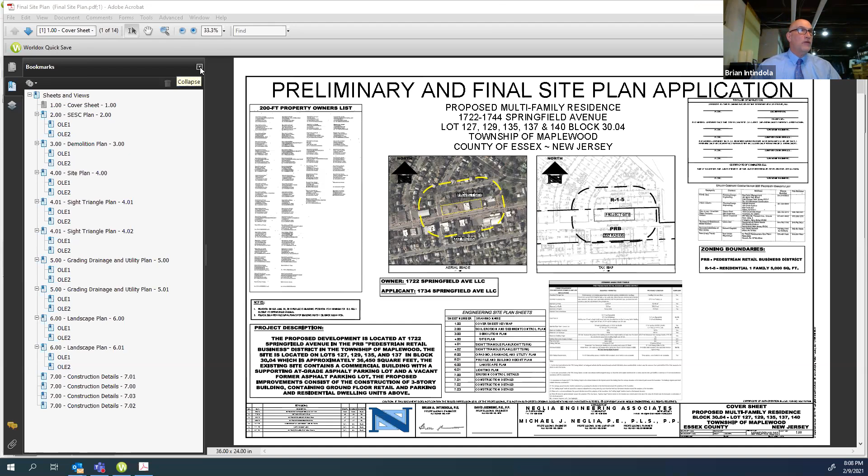Okay. So basically, this is the site plan that's before you. As we were speaking about, this is the cover sheet. I'm going to go into the aerial a little bit so we can appreciate where the neighborhood is. That yellow rectangle represents our site, which shows the existing H&R Block and the little used car dealer hut that will be demolished, as well as the H&R Block, to make way for the project.

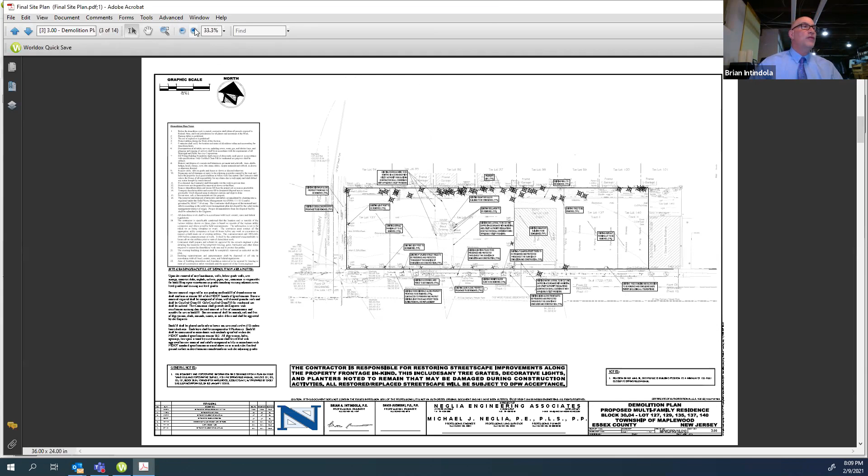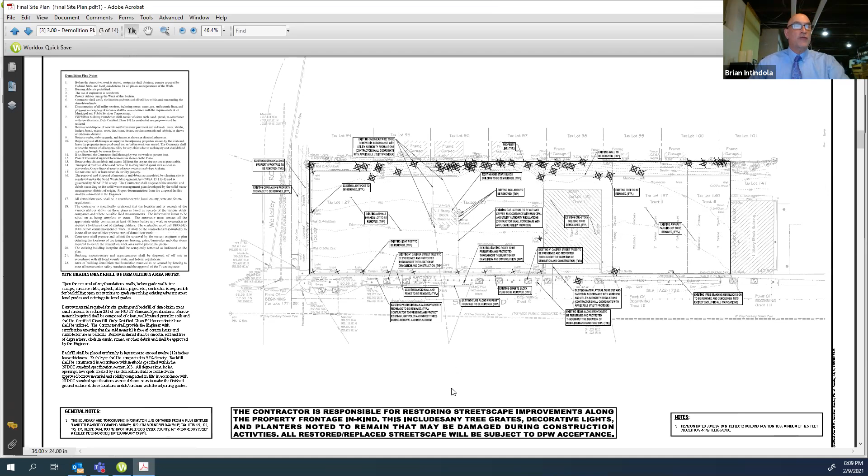We are going to remove all the open curb cuts along Springfield Avenue that are there and consolidate them into one. This would be sheet 4 of our site plan package, a 1-for-1, where you can see the parking level. We are proposing a mixed-use building with a mix of 16 one-bedrooms, 24 two-bedrooms, and 2 three-bedroom units. I believe the count is right - I don't think that's changed.

And then we have a small retail space of about 1,700 square feet that Mr. Waga, the architect, introduced. That's going to be neighborhood retail or something of that type.

As you see, our parking spaces, even though they are underneath the building, provide typical maneuverability of 9x18s with a 24-foot parking aisle, which is as to be expected. And we've strategically located the ADA parking opposite the entrance area, as well as with a crosswalk denoting that that is the area to walk in.

One of the features of this, I'm interspersing site design as well as the functionality for access, but I will reinforce that with traffic testimony as well. If we look where my cursor is, we do have an inset to manage vehicles so they can get quickly off the street and also be card managed for access in a way that it's not blocking the sidewalk.

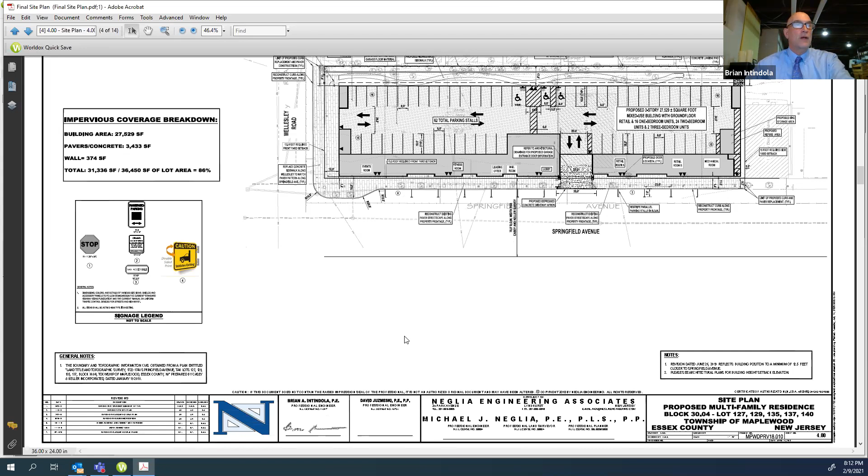As well, we heard last month that it would be appropriate to look at a fisheye mirror or convex mirror system to give a better field of vision for both pedestrians and motorists coming in and out of the site.

So then, going on to the sight triangle ordinance, I believe this would serve as a template for what you would want to see. We meet the sight triangle based on the 35-mile-per-hour road.

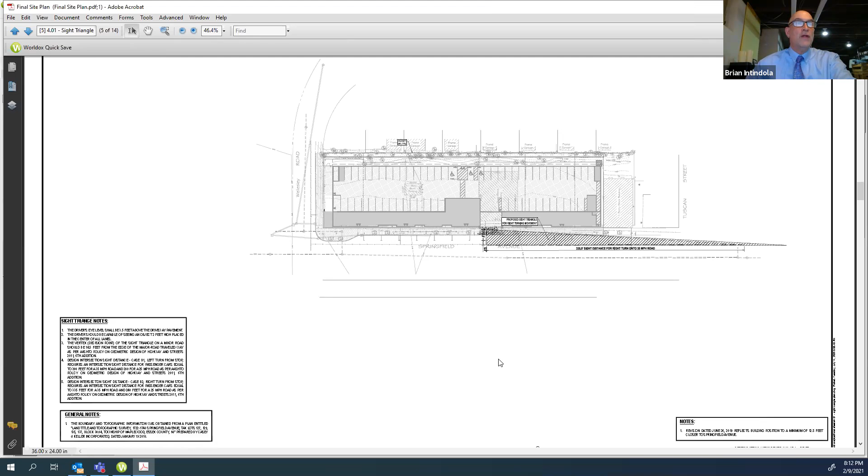That is looking out, that is the right turn out. And then we have the other one, which is the sight distance for left-turning vehicles, and we make the sight distance. We don't see any obstructions using typical engineering sight distance. So that is addressed in our site plan package as requested by your reviewing engineer.

Our next thing to touch upon is our drainage system. We are going to capture stormwater from the site, bring it into a piping system, have an oversized pipe to retain some of the water, control the water out, and then send the water out to the existing storm system, which is a former NJDOT system as well as the township system. We believe there's enough capacity to accommodate what we are piping.

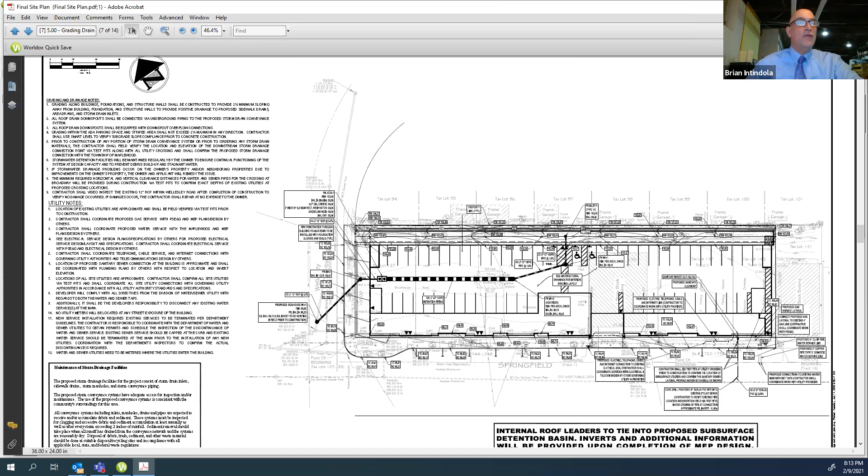And as the site is mostly impervious today, we are slightly more pervious than what is now. So we believe that, one for one, it will actually generate less stormwater.

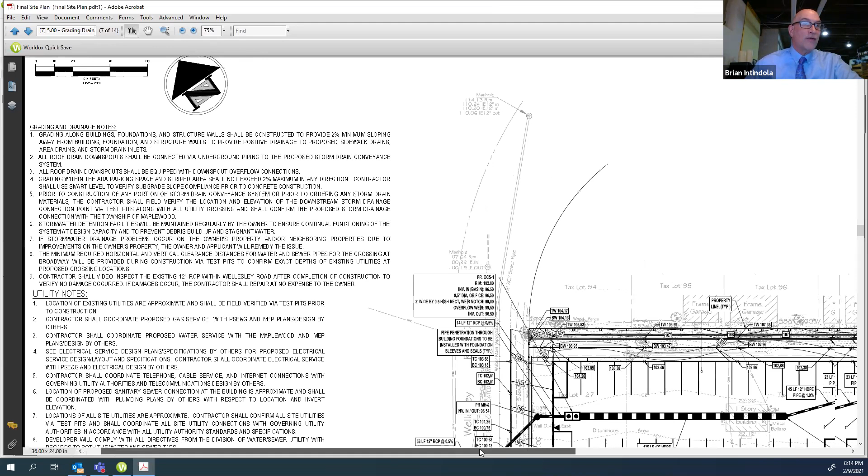I'm going to zoom into the rear yard in terms of grades. It's not really a rear yard, it's a double side yard, but that's okay - just for speaking the vernacular, this is the run. We have a retaining wall, I don't know if you can see it with my cursor, top of wall, bottom of wall. The wall follows the grade.

It kind of diminishes as we work our way down Springfield Avenue away from Wellesley, till it fades basically to nothing. One of the prior iterations of the site plan recognized that this was maybe an impediment to this exit door. We have since removed that wall and we don't have as much of a return wall as prior. This area back here has an undulating sidewalk with future plantings, which will be touched upon in the landscape plan.

Another feature of this is that we are respecting the setbacks as required for Wellesley, and also the transition lot we are not respecting next to the liquor store. We have an alleyway, and we recognize that we are asking for that variance, but it was touched upon before. And this is a walkway that, as the architect has said, has limited access out - I believe that's the intention of that walkway.

We did provide that. And we also note that we are respecting the Wellesley setbacks, and we provide a, well, I'll characterize it as a generous sidewalk in the front that can be used for the intention of the pedestrian zone that we're in, providing plenty of pedestrian space for that.

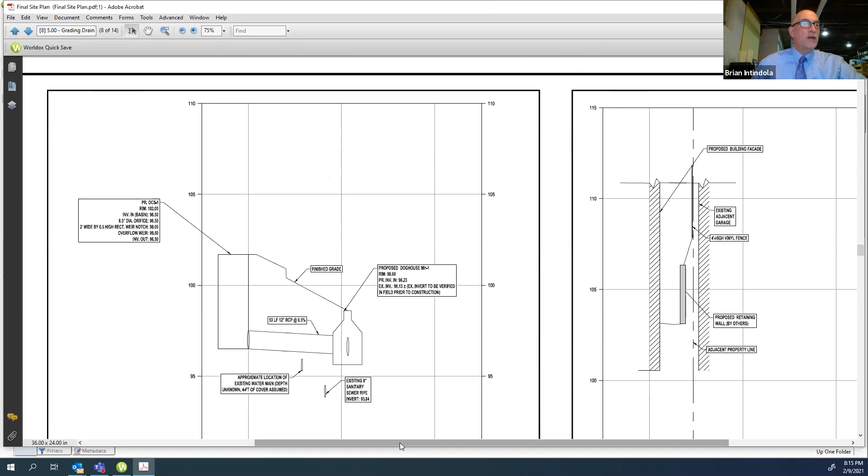These are just some of the details of the site plan in terms of elevations that were requested. And then we have the drainage and the profile, and the building height is all marked here. That's how we get the average grade - it's 101.

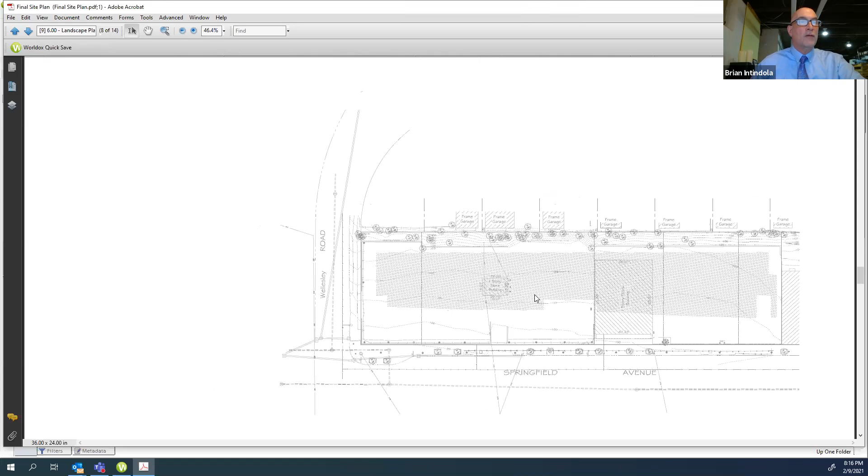And then I believe that the architect, as well as our planner, will talk in more detail about your ordinance with respect to height.

And here we have the landscape plan. We are removing the various trees that are in the back, but we are replanting a run of emerald green arborvitae, about 61 in total. And then we're doing 3 accent trees in the undulating path in the grass area in the back, which will be accessible back by the garage, as well as the exit doors in the back corner of the site that lead to that alleyway.

If I may, sir, quick question. How tall will these arborvitaes grow? What's the maximum height?

Well, if they're done right, I've seen them be comfortable at about 20 feet. They can come in at various sizes. They have most success where we put an irrigation system in with a soaker hose, and I would recommend we come away from this meeting with that as a hard condition, so we have some assurance the arborvitae do thrive. As for the install height, we're looking to go not the 4 to 8 size, but maybe the next size up, so we get immediate screening and don't have to wait for nature to take its course. The intention is they're installed at 8-foot minimum.

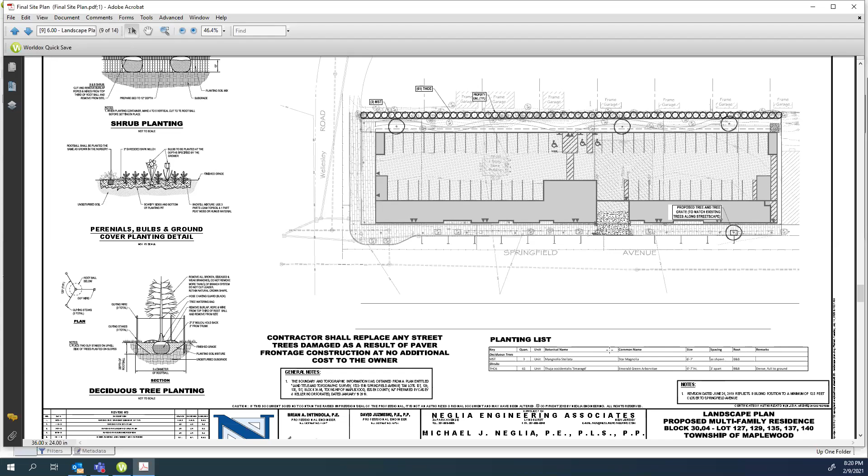Yes, I take your comments to heart, and fortunately we have an excellent hybrid planner/landscape architect on our team, Mr. McDonough, and we would like, at your lead, to come back with a plan that will be interesting to look at through the 4 seasons — not to editorialize what you're looking for, but something more interesting instead of a palisade of arborvitaes.

We understand what you're saying. And just as a side note, not that I'm a landscape architect, what we found recently — I just planted them myself — is that they have a double blooming lilac. I didn't know if anybody knew that. It blooms in the spring and in the fall, so maybe we can work them in as well. I'm a big fan of lilacs.

But yes, we would come back. Of course, as the advocate for the applicant, we'd like to be one and done, but we understand the careful thought this board gives to its applications. We would come back with a more carefully thought out and hopefully beautiful landscape plan for the rear portion. So I don't know if we've answered that comment, but we're willing to participate in that process.

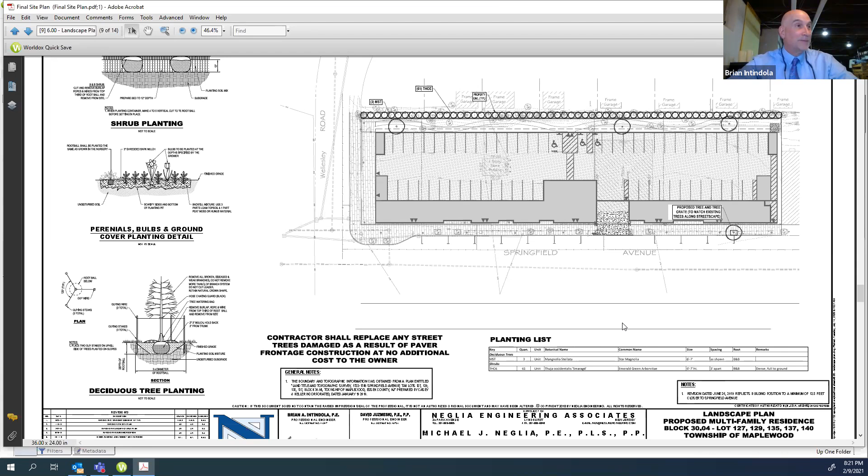That is the overview for the lighting plan we need to discuss. What we are intending to do is mount as much as possible and provide the functionality that we need in the rear yard, or the undulating run in the backyard.

We provided a well shielded light that respects your ordinance. As you see in the lighting plan before you, it would cut off at the proposed privacy fence, which we are going to construct on the property line, a little bit off the property line as is typical. We're hoping to put in a tasteful PVC fence, which is the current style, and then we would have the trees to supplement that as well. That's what's illustrated on the lighting plan, sheet number 6.01.

Mr. Intindola, just for clarity, so the arborvitae or some other natural screening would be outside the fencing? It would be. Working your way from Springfield Avenue, going out like a rear door here - you're in the grass area, then onto the sidewalk, then you encounter the knee wall, the retaining wall to make the grades work, and then you'll have a row of arborvitae, and then the PVC fence.

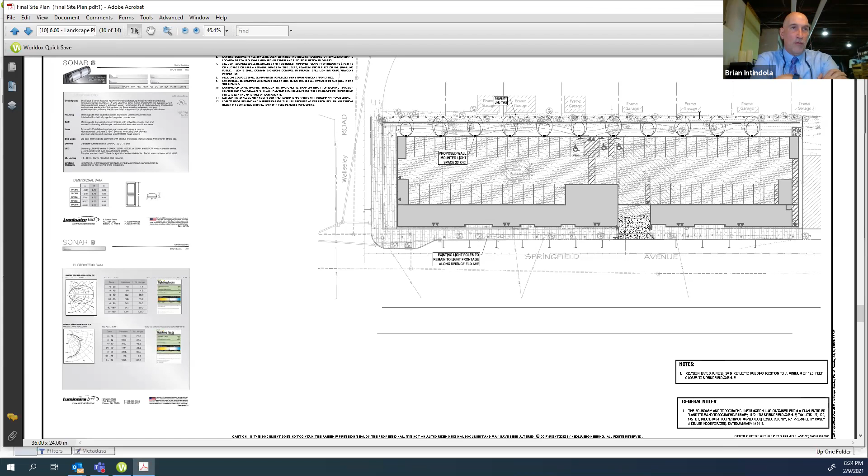And how high will the PVC fence be? At the board's pleasure. I'm a fan of the 5-foot fence myself. I think 6 is sometimes a little bit walling off. And I think interspersed with the garages that are there, the 5-foot will work nicely. Then you'll have the hopefully tasteful plantings poking over the fence in the future or upon planting.

And the bottom of the fence will be above the grade of the knee wall, correct? Yes. So how I grade that is I like to put a little back pitch so that you don't have the airspace between the bottom of the fence and the backyard. So what we do is set the fence, and then I basically build a small berm as we come up over the top.

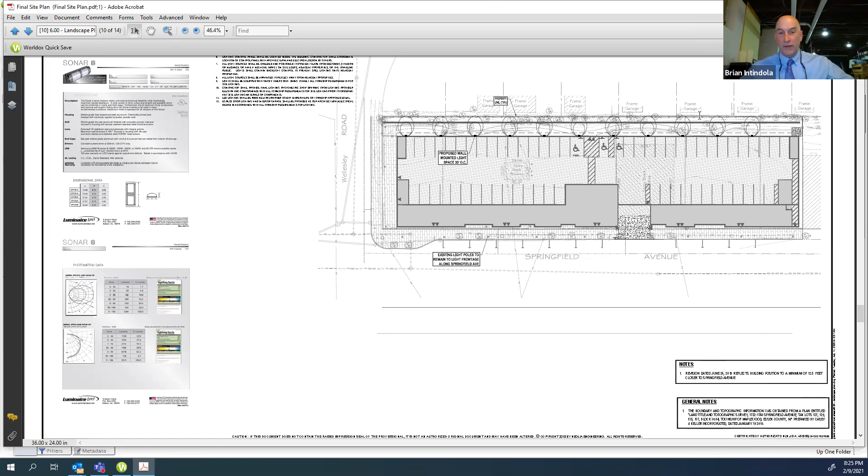It's just enough to cover that airspace, which is the way I like to do it. We'll follow that through on construction. It gives you the sense that the underneath is covered - instead of burying the bottom of the fence, you come off a little bit, then build a little berm to cover that gap space. When you set fences on a hill, you'll sometimes have a staggered fence line that has to drop down, and that drop helps make up for it, because then one section is clicked a little higher and then down low, and I can do a consistent line across the back of the fence. That gives you that little detail.

I apologize for that ringing phone. My family, I'm sure, will answer it momentarily. I'm waiting for my father-in-law to call me.

So what I'm getting at is that if you're standing on the sidewalk - the undulating walkway across the back, not the sidewalk in the front, I misspoke - I understand what you're saying. Right, so if you're standing on that, the knee wall will be how high?

I think in that area it's about 5 foot. I can go to the grading plan and give you a definitive answer, but that's my estimate. I'm trying to get a sense of how high the PVC fencing will appear to be. I recognize that it will be 5 feet from grade if that's what we choose ultimately, but I'm trying to get a sense of how it will appear for someone standing on that walkway.

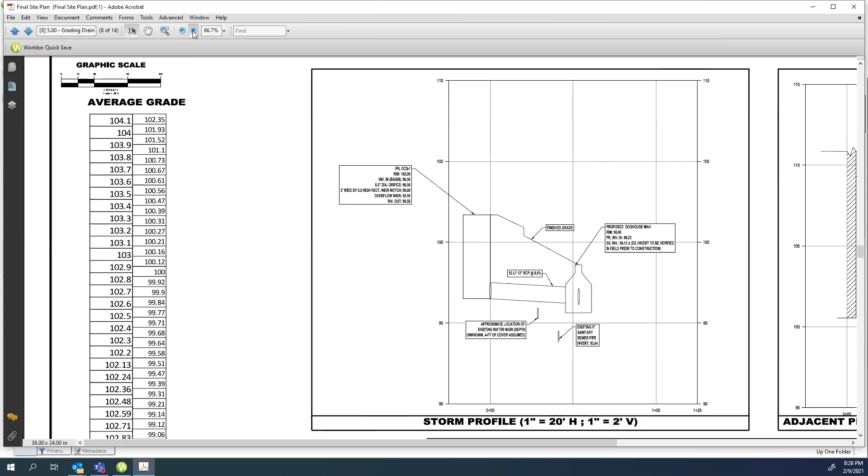Yeah, and I totally agree, Chairwoman. I think we said this at the last meeting that a section would be really helpful to see what it looks like from eye level - like I'm a neighbor, or I'm walking along that path, what am I seeing? As opposed to these tiny drawings that I literally need a magnifying glass to look at. But I get it.

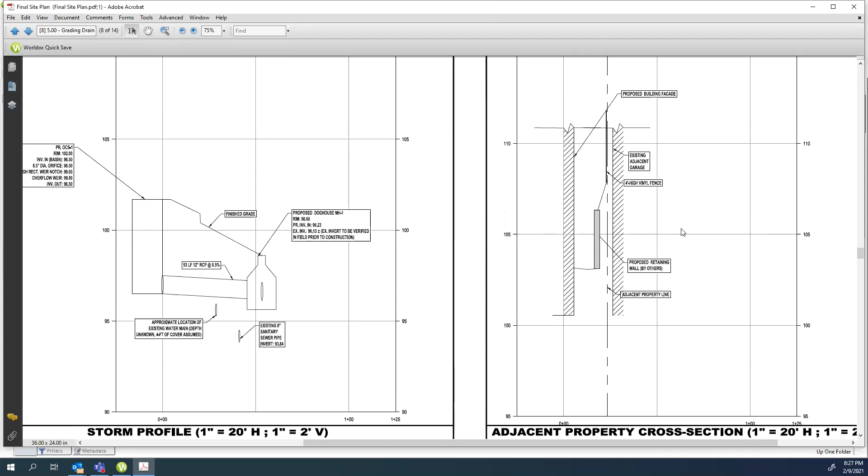We're restrained by this, but I think it would be good to have a section, like I asked for at the last meeting, showing what the people who live on Amherst behind it see. Go ahead, Brian. I was going to address that, but go ahead.

So to answer your question, we did an engineering cross section. I don't know if it serves the purpose or not, but we struck a line through this. That line is exaggerated with height in the vertical axis, which is typical for engineering illustration, but if you were in that spot... let me see if I can get both in at the same time. So if you were standing here-ish, where my cursor is...

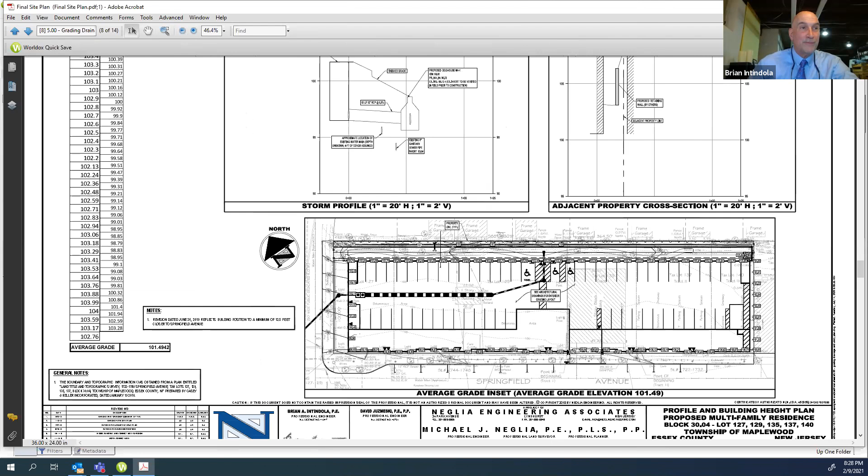What you would perceive is the proposed building facade. Then you encounter the proposed retaining wall at this spot. Then there's the upgrade where we will put the arborvitaes. Then there's the existing garage. You can see this. The existing what? I'm sorry, I missed what you just said. The existing garage, sorry.

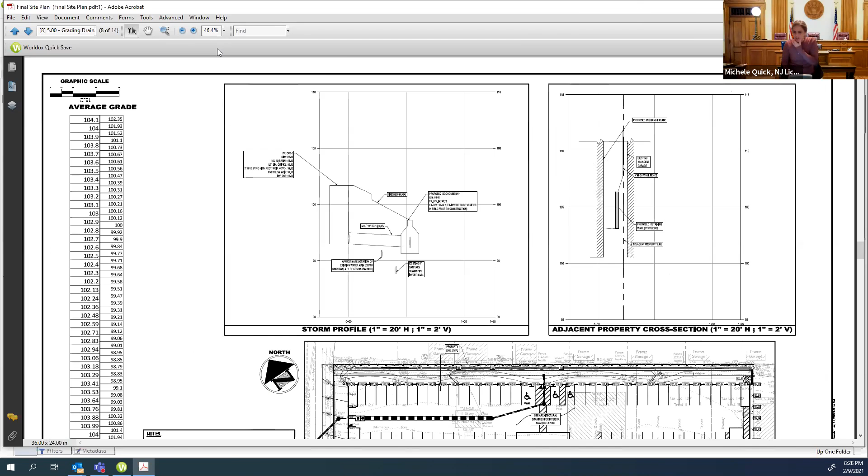Getting back so you could see it better. So then you would see this is basically grade. This is the proposed retaining wall, like the knee wall. And in this axis here, you have what we illustrated, a 4-foot high vinyl fence, which I said was 5, which is what I prefer, but to be consistent with the plans, it is 4. And then you have the adjacent garage in that section.

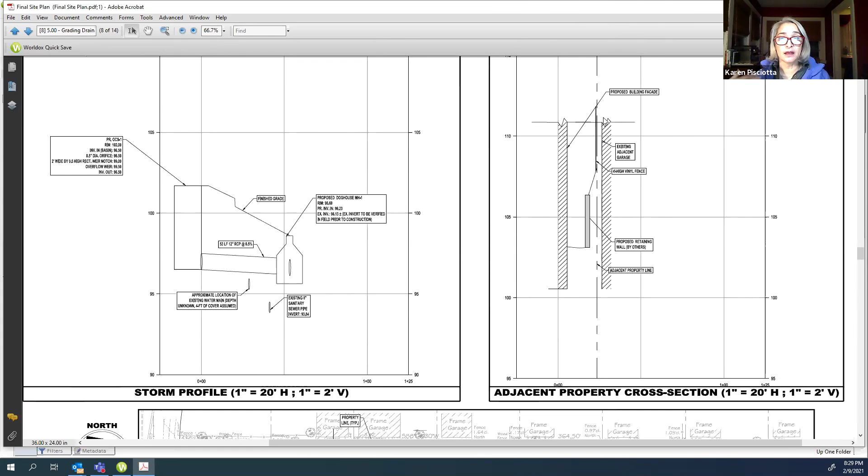So if you would look, I think one of your comments, and I don't want to mischaracterize what you were asking, is that you may feel like you're in an alleyway in this run. Well, that was part of my concern, but it's helpful to see that the garages of the adjacent neighbors are very close to their rear property lines. I'm not suggesting there's no need for a fence. I like the idea of a fence, and I like natural screening. I just wanted to get a sense of what that height is going to be like, because part of my thinking on the fence height, 4, 5, 6 feet, whatever it should be.

And I don't have a strong opinion yet, is in thinking about the placement of the fence, the grade, the changing grade from the knee wall to the berm you're recommending, to the fence after that. So although it may be a 4 or 5 foot fence, for someone standing on the undulated walkway, it will appear to be a much taller fence.

Oh, absolutely. But the other view, the 180-degree view, is that if you're living on the back street, you have a good-looking PVC fence at the appropriate height to provide the screening you want. So from the applicant's perspective, and I might be getting kicked under the table, but he can't because he's not by me, which is good. So we would provide the fence height as appropriate that the board would like. Basically, if you look on the backside, not that I did the calculation, but the frame garage here looks like it takes up about 40% of the view shed. And in the space in between is where you'd see our fence.

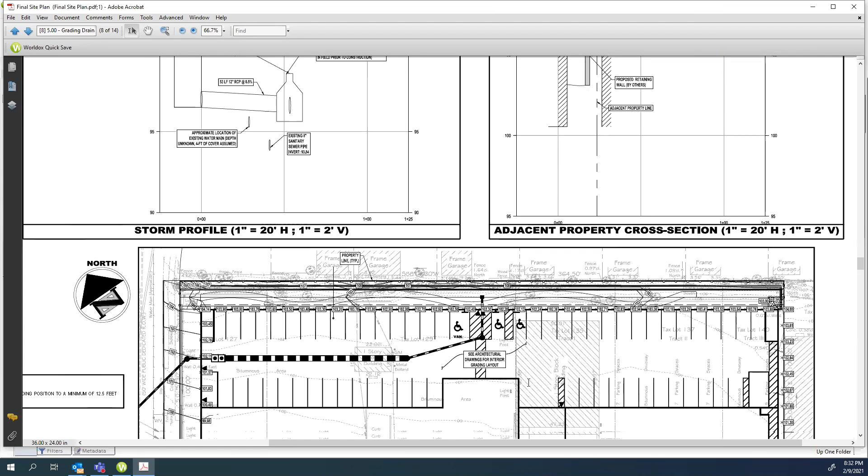Oh, sorry. Could I just, while we're on the fence, add - I didn't miss the irony of your attractive PVC comment, because I don't think those two words go together. Is there a concept for something better than a PVC fence?

Well, if we go through the catalog of what fencing is available - we start with chain link. That's a non-starter. Right, then you have chain link with the evergreen strips through them. It's okay, it serves its purpose. No.

And then the next option is we switch over to wood, dimensional wood, like a shiplap, every other board, which gives you some dimensionality. I don't believe it weathers as well as the PVC, so it might require maintenance by the property owner. No, and we're not averse to that, but what I notice is that the standard white PVC fence, like you'd see at a pool club when it first came out, has gotten a little better, and we could do a wood grain PVC fence with lattice on top.

Not that we're going through catalog cut sheets right now, but if we are coming back anyway for the landscape plan specifically, I believe we should also offer a couple of cut sheets for the board to look at of state-of-the-art fencing that is also weather resistant. I don't know, is that a decent proffer for the board?

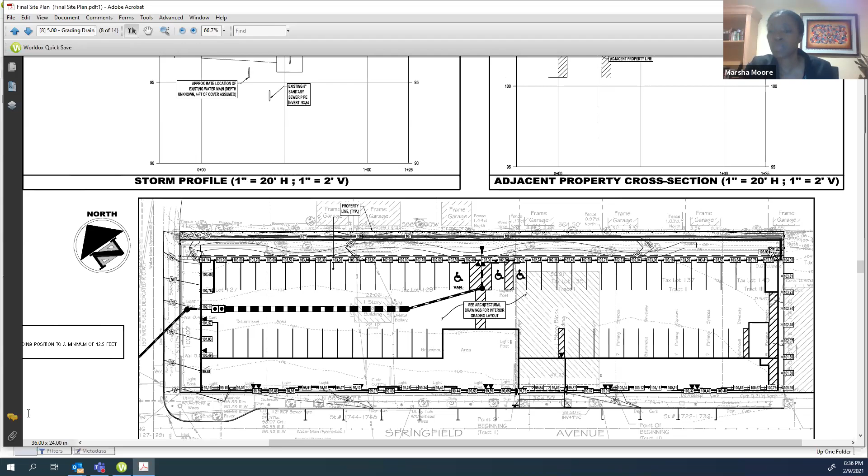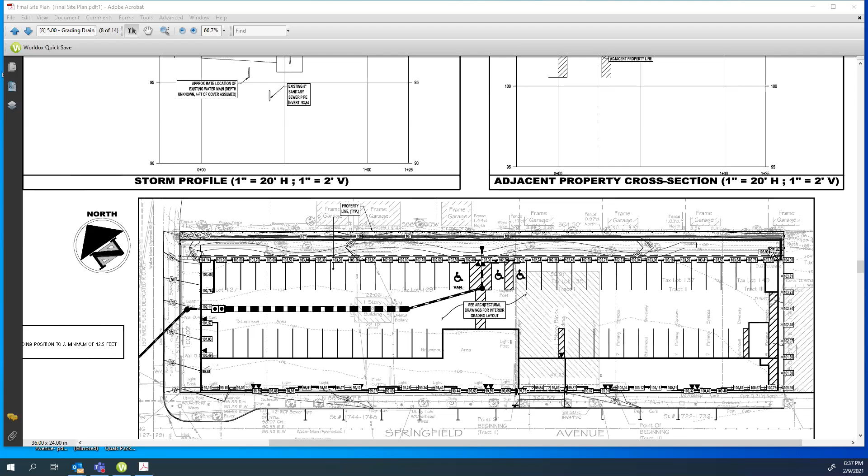Madam Chairwoman, I believe Deborah Lyons, who's chair of the Springfield Avenue Partnership Design Review Committee, is present at this meeting. So it would be great to get her input if what we're trying to do is get through this. No, I'm absolutely agreeable to that, if Ms. Lyons is willing to address the board at this time.

Hi, can you hear me? Yes, we can. Yes, we absolutely did make a recommendation for fencing, and we asked that they not use PVC fencing. We made that recommendation more than a year ago, but that fencing keeps showing up on their plan, so that's the history of that. We would like them to use wooden fencing, in deference to the residents behind them.

That's fair. Thank you.

I'd like to get back to the question I was trying to get answered, which was for Mr. Intindola. Showing us the cross section at the line you had drawn is absolutely helpful. What I'm trying to get a sense of is, at that line—realizing the pitch changes east to west as well as north to south—what would be the height of the fence from the grade?

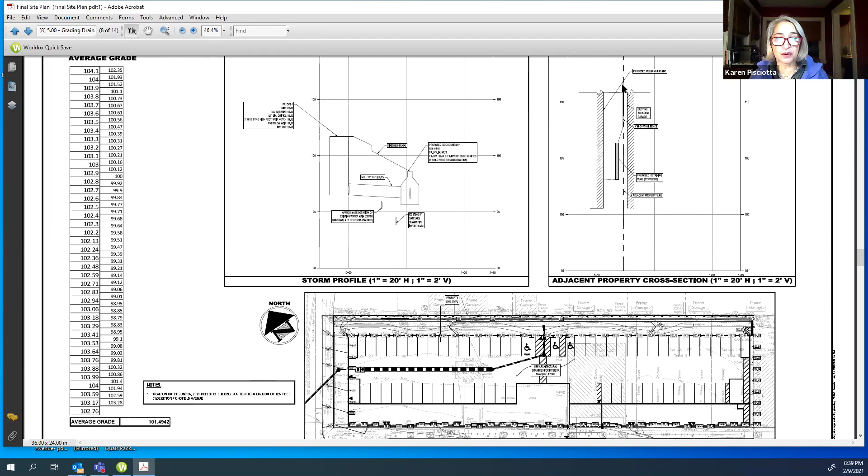Okay, thank you, that's very helpful, that's what I wanted to know. And so then that height would appear lower as you walk east, correct, because the knee wall will become smaller. Is that correct? Yes, it fades to basically nothing, about 18 inches at the end. Okay, thank you, that answers my question.

Did you want to go on with your direct testimony, or should we continue to have the board ask questions of you, Mr. Intindola? Unless I didn't cover anything, I think we covered the site, unless our attorney Marcia has something.

I do have a couple of things before you go into traffic. I know our planner will be discussing the exceptions for the parking—can you give a little testimony on the exception? The requirement is 89 spaces. You mentioned we have 61, and if we include the bike space, it's 62. But we're also seeking exception from the residential site improvement standards, if you can discuss that. Then we can discuss the traffic report you mentioned.

Under the residential site improvement standards, it would be slightly less than the ordinance rate of 2 per unit. If we take 40 times 2, that equals 80, which is your RSIS rate, because there's a mix of bedrooms. I believe my calculation comes in at about 75 in total with the mix of bedrooms. But construing our residential site improvement standards strictly, because there is a retail use, in my reading they govern only to a point as guidance, since you have a mixed-use building in this instance. If it were pure residential, I believe it would apply fully to the application.

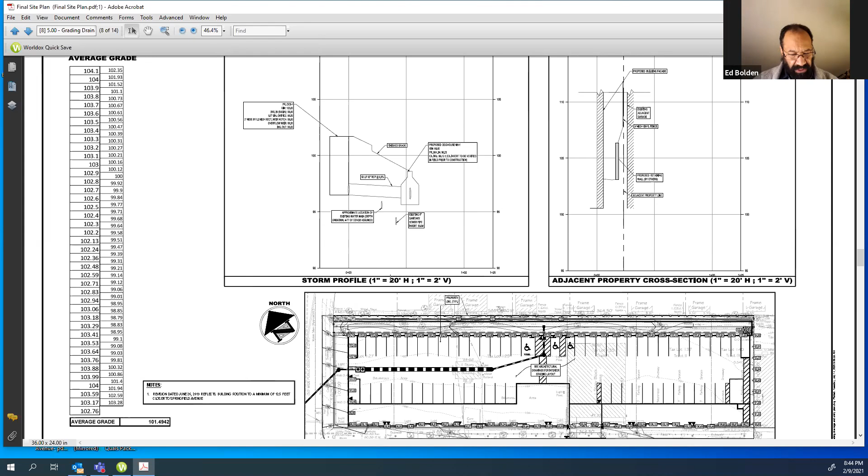That's just my experience. Well, I think you probably would need to have 2 mirrors, because 1 mirror would only get pedestrians from one direction and not the other. Correct, and I totally agree with that, Mr. Bolden. So I would say yes, 2 mirrors. 2 it is.

Madam Chairman, I have a question related to the parking and the counting of the bikes in the total. Is that standard practice to include potential bikes when you're asking for this type of concession with the requirements? Is that directed to me, or is it to the chair? I think it's actually for our town attorney, Edelson, in that this is the first I'm hearing that we're accounting for possible bike parking spots in the total number of parking spaces. I'm just trying to understand if that's a precedent.

No, we're just highlighting that we have bike parking, but we're not relying on it, I guess is the better way of characterizing my testimony. Board member, our notice that was provided was 61 spaces. We did not include that additional space to the public, whether or not we were providing 61 or 62. It was 61 that was referenced in my notice. Thank you for clarifying. Thank you.

Do any other members of the planning board have any other questions for Mr. Intindola? I have one more question about the landscaping plan. I'd really like to see, it looks like there's no plantings along the Wellesley side. And now with that wider sidewalk, I think we could get some really nice trees in. So I think you should consider some trees on that side that would make that whole building facade look nice too, as you're approaching.

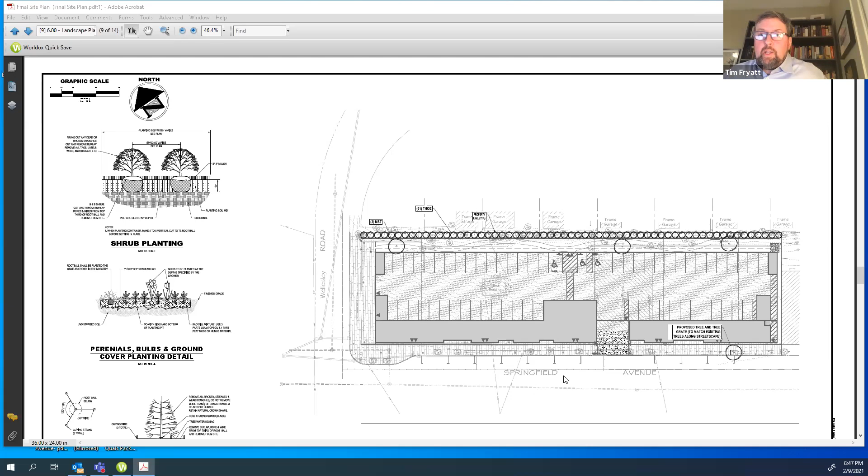I have a couple questions. Certainly, Mr. Fryatt, go ahead. There's a note on the drawings that the proposed retaining wall was by others. Can you explain that? That's because the ultimate design of the retaining wall, since it's over 4 foot, would need to be designed separately. How we approach it is that should the applicant be approved, we would provide to the board's engineer, as well as the building department, specific calculations of the retaining wall. That's what we mean by others. The development is providing that retaining wall, it's just a question of who's engineering it.

Yes, either our office can do it, or we can have a qualified firm assist the applicant, or there could be a local preference to have an engineering firm that has worked with your reviewing engineer. We do leave that; we don't finalize engineering until it's approved.

Can you tell us what the 8x8 concrete landing pad is for? That was East end... the genesis of the 8x8 concrete landing pad on that one corner came from the prior application, and we carried that forward. The reviewing engineer wanted a definitive place, a landing pad, if you came out of that rear entrance. I see, it's for pedestrians exiting to the rear. That's the intention.

There's not a door to the rear there? So at some point, is that correct? But maybe Mr. Waga can refresh my memory. That's why that was there, that there was a door on the backside, so you can come out from a stairwell. That was my understanding. That's why we have it there.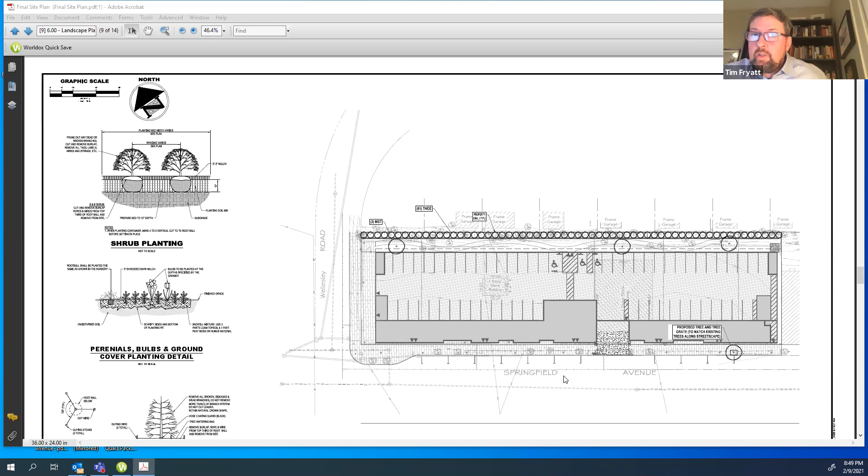I see. And the dog run area, is that enclosed? I don't believe there is a dog run, unless I have a bad note somewhere. We removed that a couple iterations ago. It's noted on the site plan that I'm looking at, which I think was provided last month. Yeah, that is an errant note from a prior submission. So there is no dog run. Correct.

You have an open undulating sidewalk. I think we might have visited this in the past at one point. Is there any opportunity to retain any of the trees on site?

Well, of course, if we are doing that, yes, because what we did was a palisade of arborvitaes, which are now going to be revised if the board's permission is given. We now are taking an opportunity to revisit trees that are removed in the context of the retaining wall and a new landscaping plan. So we do have that opportunity now. Thank you, that's all my questions, Madam Chair.

I just want to confirm, so that undulating walkway across the back, it won't be open to the public. It won't be open. It will have fencing or a gate of some sort at the Wellesley end, and it will be enclosed except for the narrow walkway that goes to Springfield Avenue on the east end. Is that correct? It is like a private mews for the residents, if we can characterize it like that. So yes, will residents be able to enter it from the Wellesley end?

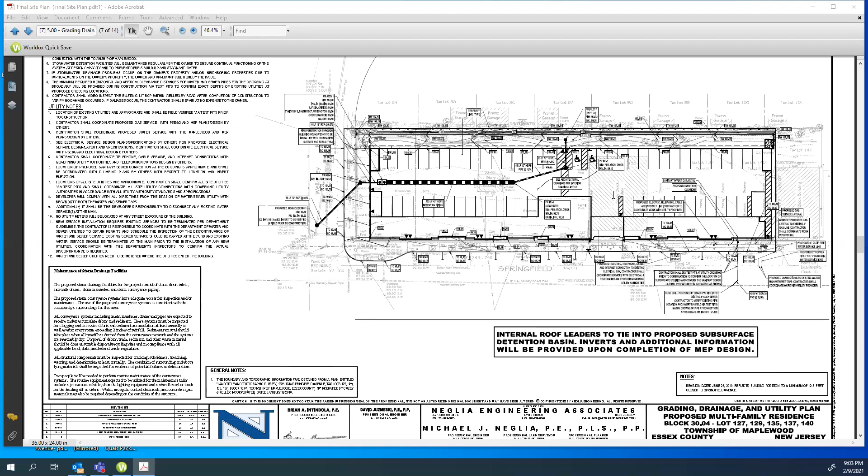I'm literally just responding to what you're saying, but in my mind I'm thinking of the sewer system more than the stormwater management - have you looked at that? We have an old system obviously, and I'm wondering if there's, with 40 units, any improvements to that system being proposed. Excuse me for my ignorance on this, I just thought of it and haven't looked through the plans, but I didn't want to let it go unasked.

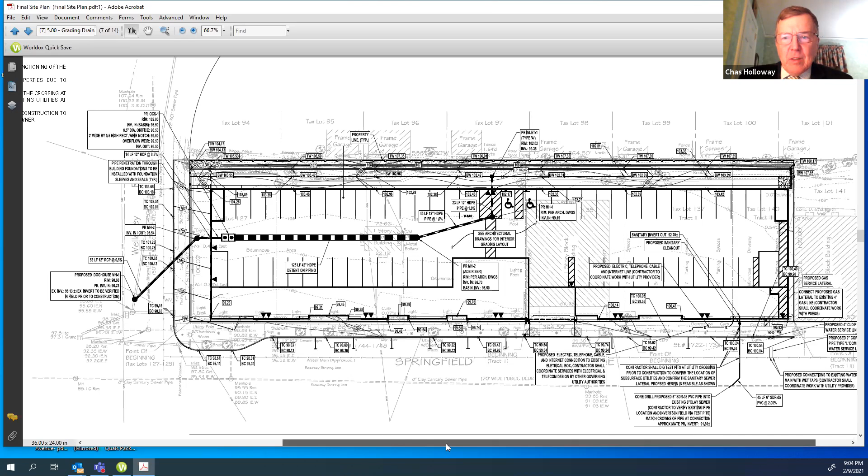No specific comments - it's not atypical for construction on Springfield Avenue. We just did one further down the street for a commercial establishment. It's a little bit complicated digging up Springfield Avenue, but the capacity seems to be there.

I'm just going to zoom in on the sewer connection. My concern is because we are literally spending hundreds of thousands of dollars right now to upgrade this system on Boyden Avenue, due to issues with too much usage now that wasn't intended, into this old system. I don't want to run into the same thing a couple years from now, where we're asked on the township committee to have a capital budget request for $400,000 to improve this because we allowed for 40 more units on top of this many units and this many units.

And typically in a redevelopment zone, that's a developer's agreement portion, but I don't want it to go unanswered before this comes to any kind of conclusion. So I understood - the connections, we could ask the applicant to supply some more information, but the main reason for the connection is how they core drill it and connect to it.

Right, but is there any way to analyze what the usage of that would be, whether or not that's something we need this applicant to address, if he's taxing the system that's already there to such an extent that the township then has to, a few years from now, take the burden to fix the issue of more use than it was intended to have. No, I understand the question.

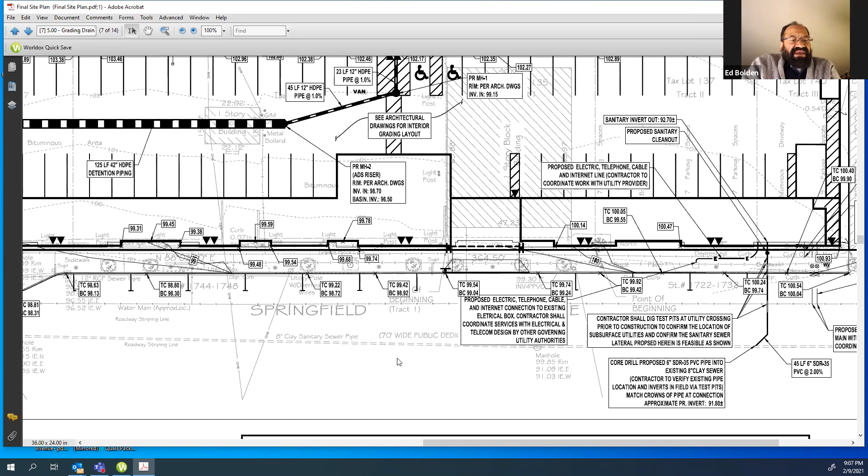Madam Chairwoman, I have one question regarding the retail area. That is for the delivery of inventory, stock, or whatever you want to call it. How does the developer see that being done? During what hours would they be delivering product for these retail facilities?

What we envision is that once you do your fit out for whatever retail it may be, most retail is supported by a panel van delivery, like a UPS truck, a FedEx truck, or a larger vehicle like an Amazon delivery van. I don't think we would need the support of a larger truck unless it was specifically a chain whose logistics go to larger trucks. But we would respectfully submit to the board that this would be neighborhood retail.

What could be here is a dry cleaning pickup, not a plant, or something of that nature. So I don't believe we need to support it with the next level vehicle, and it can be supported with a typical parcel van that is already making deliveries on Springfield Avenue. They would avail themselves of an on-street parking space to make their delivery, as any other retail business on Springfield Avenue. Well, understood, but I guess I'm wondering what time of day these would be done.

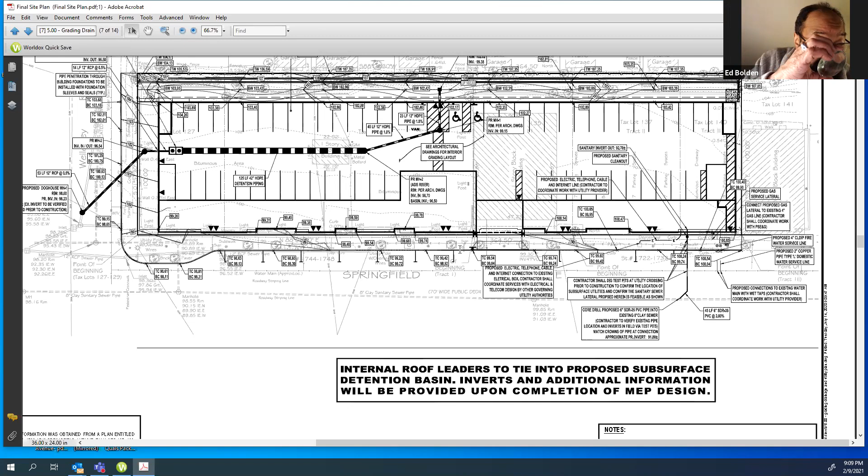Because, to be honest, from the architectural drawings, even with a microscope, I really can't make out the dimensions to anticipate what the square footage is. Well, the square footage is about 1,700 square feet total. Approximately 1,726 for the two proposed spaces. So it'd be like 800 per, which really lends itself to neighborhood retail.

The demising wall between the two may change a little bit, but we're figuring about 800 each, 850 each, which is not large. Basically, as we know, retail uses are diminishing, so we hope that this size will provide a store of interest for the residents of Maplewood.

So your deliveries would be before 8 and after 5, or anytime during the day? I believe that for a small retail like this, it depends on what you're selling. I don't believe we're going for a food use, which would have an early AM delivery. I can't vouch for the ultimate retail that's going to be there, but if there's a delivery restriction that is compatible with Springfield Avenue and the residents, I believe any reasonable delivery time would be appropriate, because we're not providing a loading space.

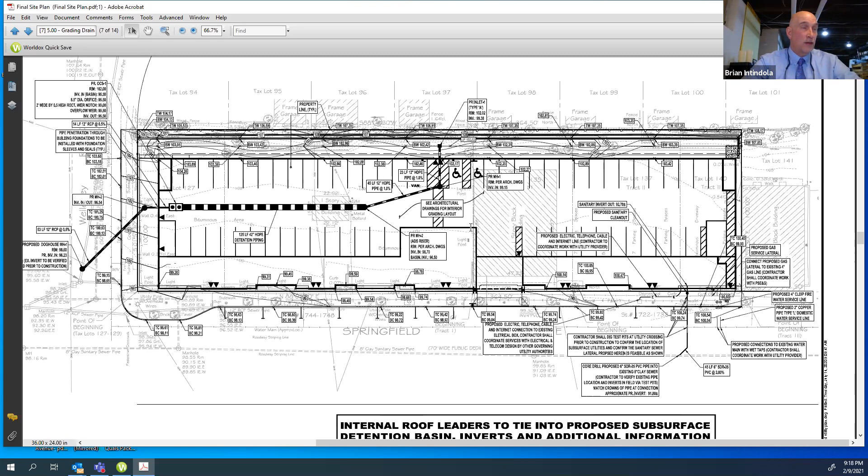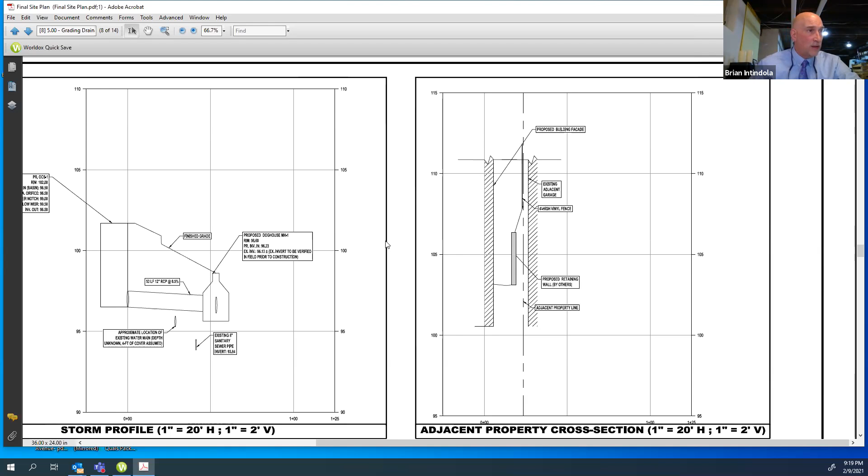Okay, and what is the height of the proposed replacement trees at their maximum? Let's assume they are arborvitae, versus the rear of the building. I don't believe we struck a line to that, but let me go back and provide the answer in the section. At the top of our section here we'd have the trees. We've consumed 5 feet, so there would be 15 feet, we'd be about 115. I don't have the elevation on the site plan for the proposed building because we typically don't do that, but I believe we'd probably be just midway. This is from recollection, with the 20-foot tree, probably midway or three-quarters of the way to Mr. Waga's first run of windows.

The first run of windows on the first floor? On the residential first floor, yes. So there would be two other floors, or one other floor, with no windows exposed? It's parking and resident one, resident two. So the second floor would be exposed to the back? Yeah, that's based just on recollection of Mr. Waga's testimony, but I think that's where we would be at.

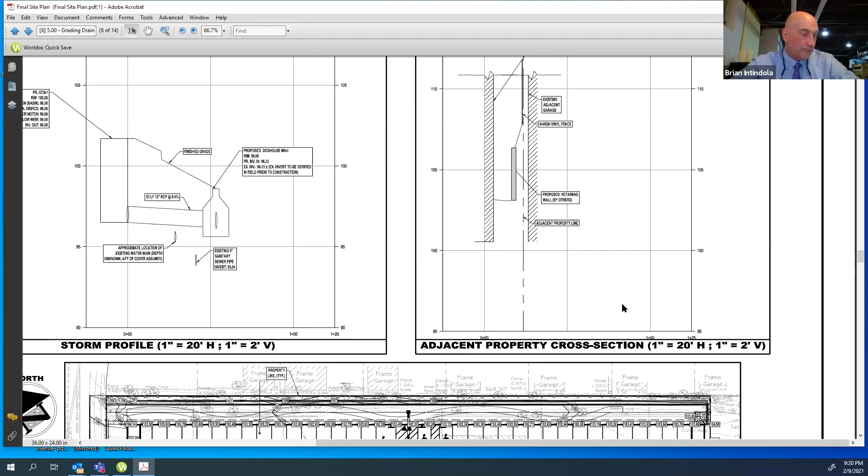Okay, and is there an assessment or knowledge of the amount of sunlight in that planting space back there? I happen to know it's challenging right now to even grow tomatoes in those back lots, because the trees that are there now block the southern exposure and the line of the sun. So when a building goes up of that height, I would imagine the sun required to grow most trees would be blocked from the back of the building.

Is there any option for shade trees that would be enough of a height to create a suitable barrier for residents? Yes, that is the board's direction we're taking, that we modify our landscape plan to make some more variable landscaping for both the residents on Amherst as well as from the apartment side. So yes, there's an opportunity to come up with a species that would be compatible to the sunlight that's there now or in the future. But ultimately that would be part of the modified landscape plan, subject to the township's review to be acceptable and in keeping with what's suggested in this hearing.

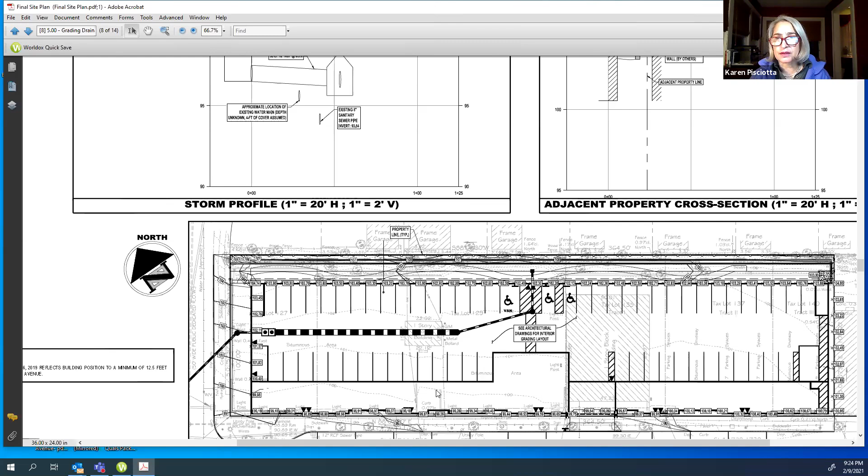All right, so that's all the questions I have. Thank you. And just a related question, I would assume that the plantings will also help mitigate the effects of erosion, is that correct, Mr. Intindola? Yes, we can look for species that can hold their roots well. And so the answer would be yes. Great, thank you.

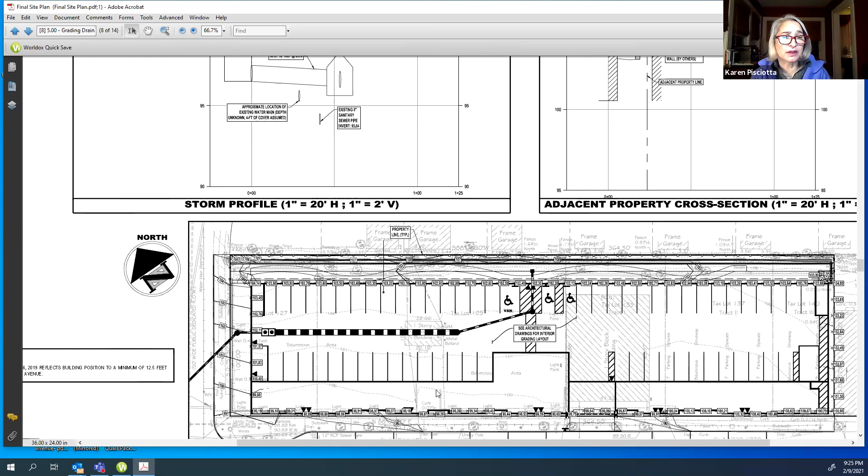There was testimony that the traffic patterns would complement Springfield Avenue, this is the AM and PM trip generation. Has the same study been done for what kind of traffic will be on Wellesley and Amherst, and whether that will complement those roads as well? I'm concerned that while it might be appropriate for Springfield, a lot of these people coming out are going to zoom up Wellesley to get to Tuscan and out to where they're going, in a very residential neighborhood which has approximately 20 school-age children on it.

So if we were to talk about that, right? So if we look at the AM peak when people are going to work, we have 22 exiting vehicles. So say if, and this is all hypothetical and on the fly because I don't believe we needed to look at the impact on the side streets, because unless you work in the neighborhood, like at someone's home office, why would you need to be there? But moving on, so of the 22 exiting, say if we round that to 25...

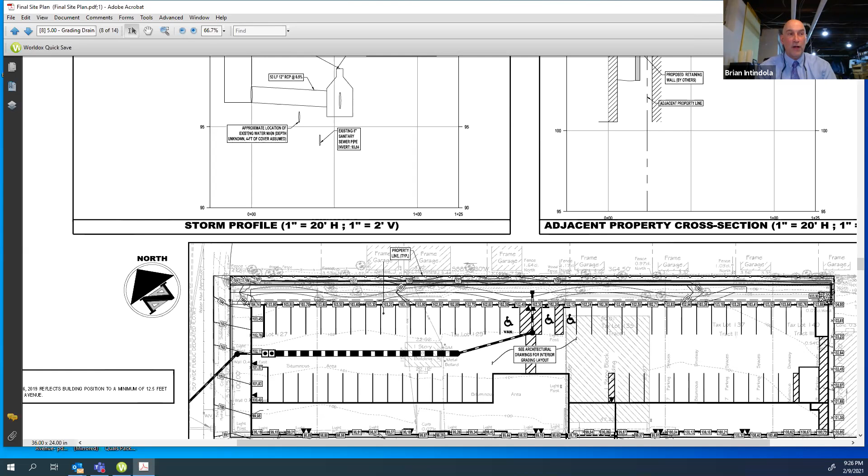22 is fine. So even if 7 vehicles go back around for whatever reason that they couldn't use, it would be the left-turning vehicle coming out of our site that would maybe want to make a right and go back around, right? So how many vehicles would that be? So then we know that the way Springfield Avenue is striped, it has that center lane that is excellent for left-turning vehicles as a refuge lane. It's called a double left movement with the refuge lane, and that's recognized by traffic engineers as a way of encouraging that, and it does.

So even if there were 7 vehicles making the left out, and they preferred to make a right out, maybe of those 7 that would prefer to not make the left, make the right, maybe 4 would go back around to Amherst. So I don't believe that is a heavy number of vehicles.

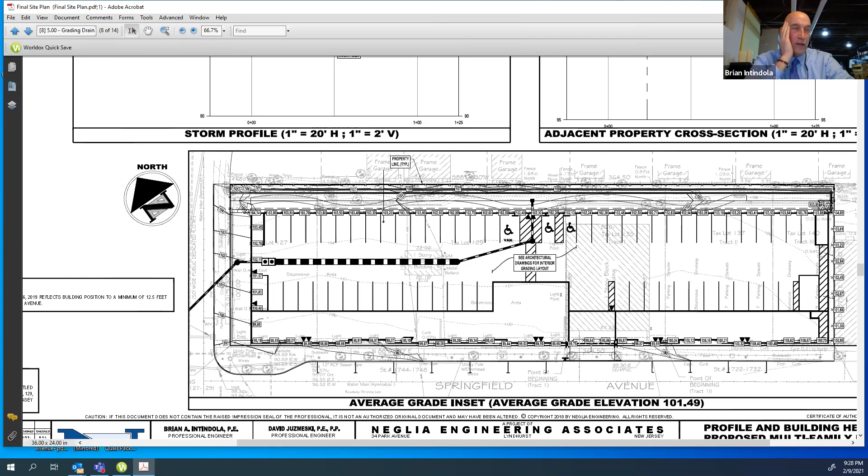And to put it into context, when you do a traffic study, you may have heard that significant volumes are to be encountered and studied in depth when you have 100 trips. Even our gross total of like 35 and 30 is two-thirds less of what you'd consider to be a significant traffic generator. So I believe for those reasons, there would not be a need to use Wellesley and Amherst to circulate. I just don't see the need for it in this particular project.

Okay, I mean as a resident I find that lots of people do. It is a very trafficked area because of its proximity to Springfield. And I think, I know you did it off the cuff, but I think you're underestimating the amount of people that will turn right and then turn right and go up Wellesley to get to Tuscan, to get down to downtown Maplewood. That's where the police go, right? They go up and down Tuscan, and that's what a lot of people do, and they follow that road and they cut through this. It's already, in my assessment, not the safest of roads, and I think we're adding to it here. But I appreciate the fact that you had to do that off the cuff. I don't have any further questions.

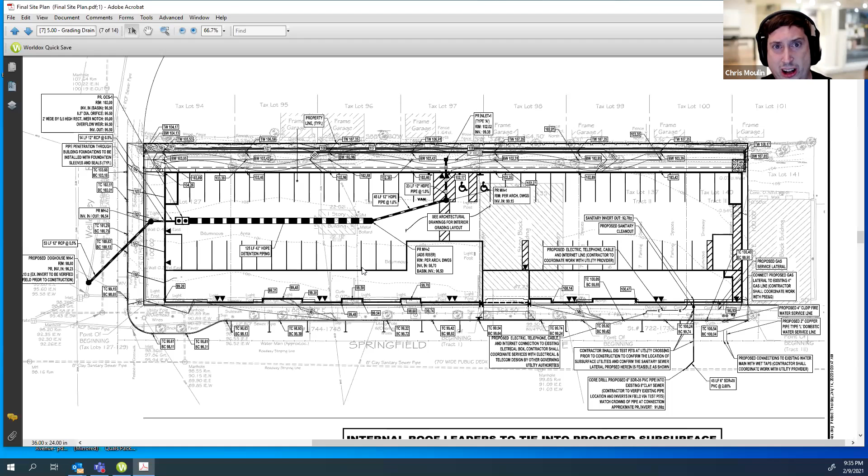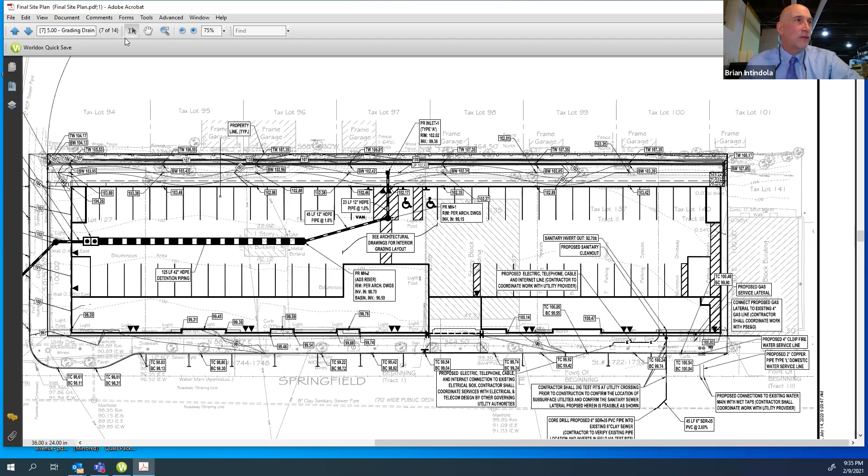Then it dies out, and that L shape will help ensure my concern about the frame garage behind it is being supported structurally in the same way that the earth there currently supports it. Yeah, I think in the end you might have a better situation because you'll have the structure of the wall that will stabilize it.

The trees behind it will be gone, however, correct? Yes and no, because if we can salvage some in a revisited landscaping plan, most likely, because there's a grouping of trees there at the frame garage, but there might be some that can be salvaged.

How will the hill be structurally reinforced during construction of that retaining wall? I think we have a soil conservation plan that has to be reviewed by Hudson Essex Passaic Soil, and we are providing all those typical details during construction that would be appropriate at that time.

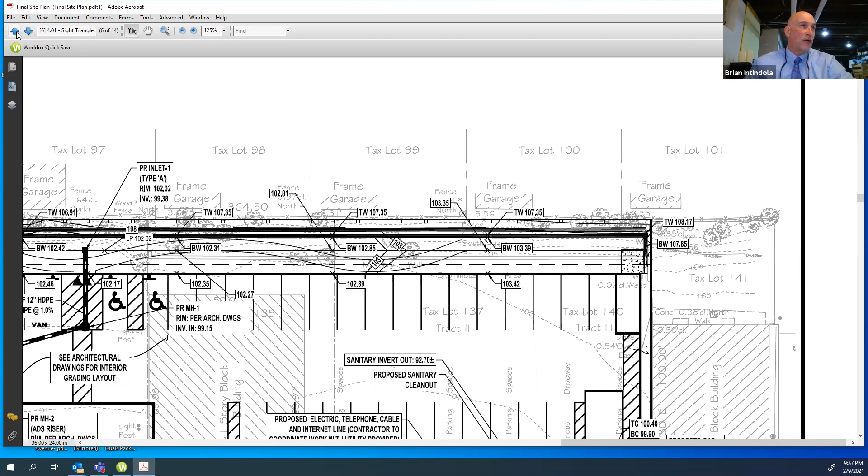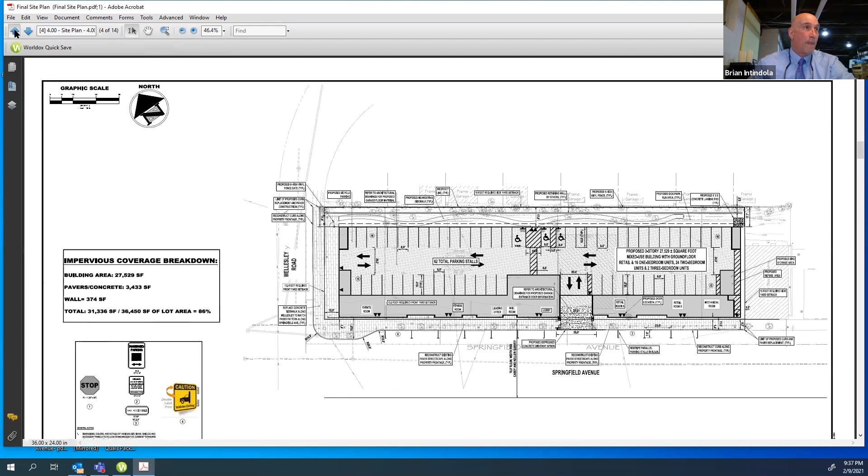Okay, but there's no plan right now? Would it be done after approval? No, we have a soil conservation plan in our package. It's in it, so we've already accounted for it, and should we be approved, we update it, because sometimes between initial submission and final submission they change their notes slightly, and we check in with them, see if their notes change, and then submit the soil conservation plan. And the soil conservation plan is what shows how everything will be structurally kept safe during construction? Correct.

Next question I had was the slope of the 5-foot buffer once the retaining wall is in place. What does that slope look like? It varies, but I like to limit it to no more than a 1-on-3 slope. I prefer 1-on-2, and we try to make that work for the majority, between 1-on-2 and 1-on-3. So for every 3 foot you walk, it goes up 1 foot. That's basically what we're trying to get, which, depending on the soil, goes to its natural angle of repose so it doesn't roll down the hill.

And how does that differ from what it is right now? It would be less actually, because we're making the retaining wall to catch grade.

For the fencing, regardless of the material, how would it be installed and anchored? I ask this specifically because the temporary fence that was put up was actually drilled directly into our fence. Yeah, I don't have any knowledge of the temporary fence. So I'm curious how the new fence would be installed so that doesn't happen again.

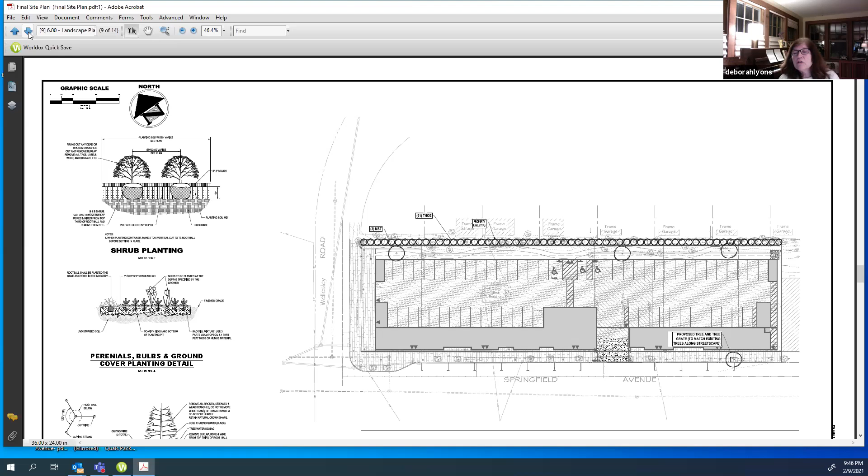Hi, I just wanted to follow up with something on the trees that Mr. Fryatt and Mr. Titus talked about. I'm not quite certain what's the impetus for removing the mature trees on the site, because given the elevation with the residents, mature trees would provide screening from their windows, and lines of arborvitae would not provide any screening for them. Is it because you can't construct the berm with the trees? And some trees have already been removed from the site. Do you know if they were of sufficient caliper to trigger the tree permit process, and was that done? I'm not aware of that, the caliper and the tree removal, so I don't know.

As we have testified, if we have the opportunity to preserve some trees in a landscape plan that may be modified, we would try to preserve as many of the older trees as possible.

Okay, and I have one other question about parking. You talked about traffic generation, but as a practical matter, people drive to Springfield Avenue. For 1,700 square feet of retail, how many street parking spots would you anticipate needing, and do you think the street parking is sufficient for that?

In the area, we are creating a number of spaces, which ultimately would be under the auspices of the Township of Maplewood to install, or they may have other reasons for using it right away. But we believe that the spaces we're bringing back, that were part of the curb cuts for the used car dealership and the H&R Block, are almost like self-parking with respect to the retail on street.

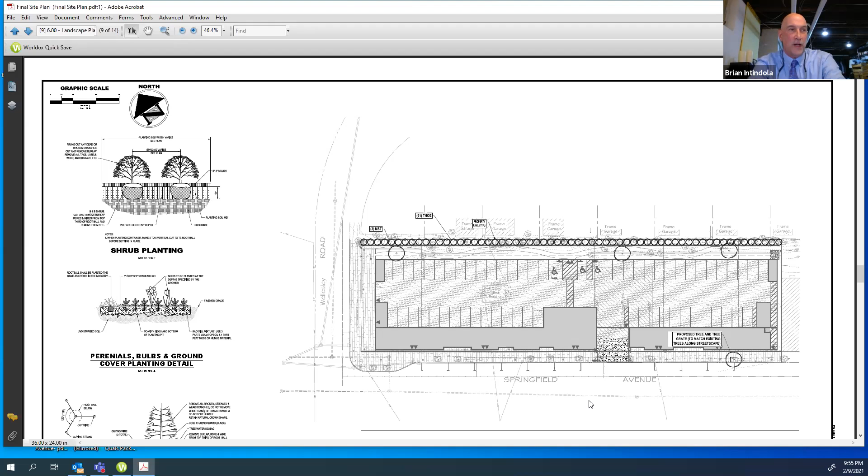Sorry, let me turn up my volume. I did not quite hear you. I apologize. What was that? The sight lines as presented on the plan are in accordance with the AASHTO and MUTCD guidelines to establish sight lines for the location in question. Okay.

I'll end my questions here. I'm sorry, I didn't hear you. Can you hear me? Oh, you said you ended your questions? Okay, I could not hear you. Yeah, I said I will end my questions here.

Thank you. Are there any other members of the public who have any questions for Mr. Intindola regarding his testimony? If so, please use the raise your hand function. And if you cannot use the raise your hand function, please feel free to speak up now. I don't see anyone who has any other questions.

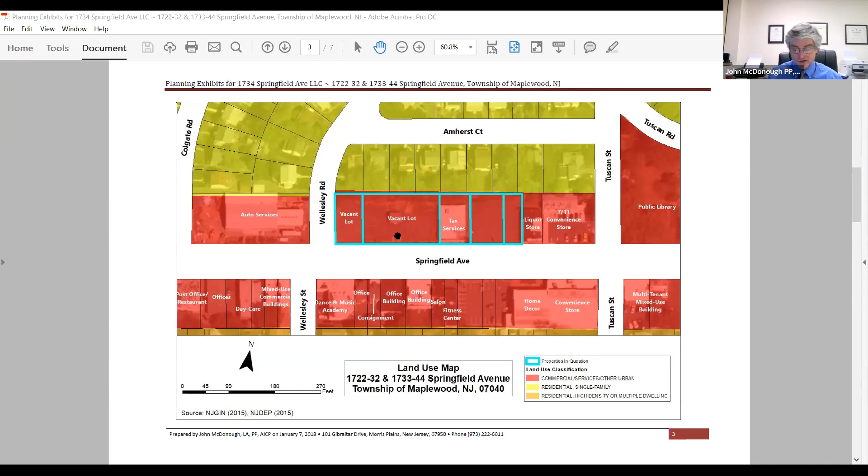Your zoning reflects that, and the plan here reflects that as well. The next frame simply shows the zoning, which is consistent with the existing use—a predominantly commercial corridor looking for the infusion of residential. This is where the PRB zone goes, and the proposed use is a permitted use in the zone district.

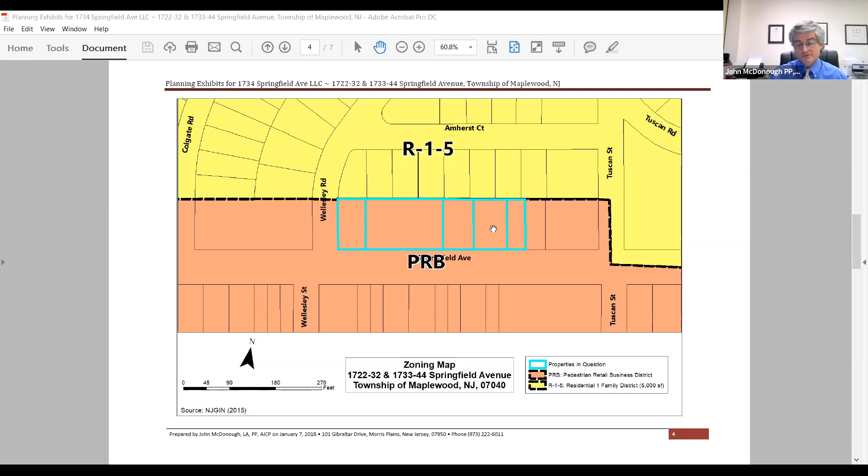With that backdrop, we'll launch into the relief that the applicant is seeking here. Basically threefold, as identified by your planners and professionals as well.

We've got the front setback relief. The sign on Wellesley has gone away. It's only the front setback on the Springfield side, which is consistent with the prevailing setback on the street, and is also in favor of pulling the building away from the rear, which benefits the neighbors. So certainly on the positive side, I think we can see this as a better zoning alternative for the property.

The planning intent to provide a walkable frontage is met here as well by virtue of that sidewalk, which will be very nice from a pedestrian standpoint. 11 feet wide to 13 feet wide is right in that sweet spot of approximately 12 feet that we planners like to see for a walkable downtown environment.

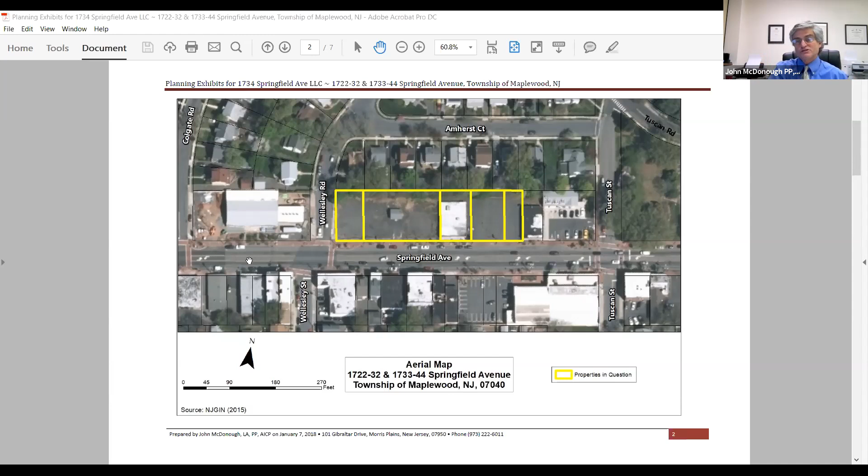That also picks up here very slightly. You get a sense of the building that is to our right. It is a windowless building, so this is not going to impede light and air by putting a new building very close within that 3-foot setback area.

Likewise, there is relief for the setback for the portion of the building that's over 30 feet. There is a step back of actually 0 feet versus the 18.34, which is similar to relief that we've seen elsewhere on the street. But more importantly, I'm going to go back to the exhibit that was provided by our architect, Mr. Waga.

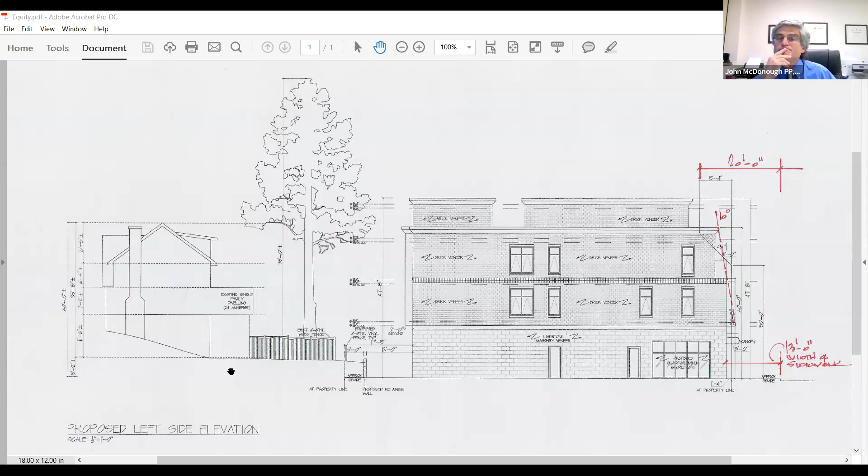I'm not sure if this has actually been marked, Marcia, or if it's been handed up. No, so if we can have this marked as A4 — this exhibit was submitted after the last meeting, submitted to Ms. Adele Lewis. Okay, so the board can have that marked as A4. Gotcha, thank you, for the record.

So this may give the board a little bit of a visual that goes towards some of the earlier comments that Brian had answered, and questions that our neighbors had as well. Let's start in the front. Springfield is going to be to the right. Dwellings on Amherst will be to the left.

Again, this just gives a sense of the building massing — the lower area behind the building, which is approximately 12 feet wide. We're going to rise up with a retaining wall in the back, and another 5 feet before we hit that 4 to 5 foot high fence, wherever we land with the fence. And I'll say the fence type as well — you can certainly fold that into the landscape plan.

The applicant is certainly willing to put in wood back there. There's some nice composite options — there's a lot of good options other than vinyl, if that's the board's preference, to go with some sort of alternate material, but certainly willing to put in the wood fence in the back. The main focus here is some of the markups we put in red just to help the board get a sense of why I think the relief for the portion of the building over 30 feet makes good practical planning sense here.

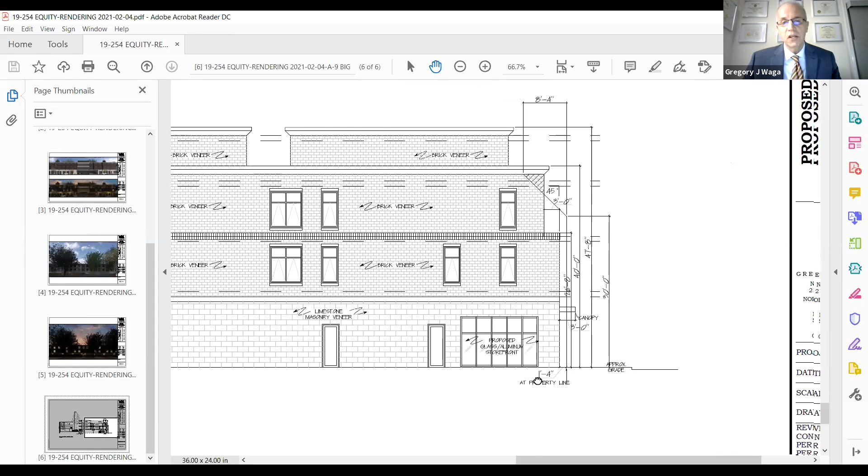Mr. Waga, did you also want to address the questions with respect to fenestration? Yeah, so what we're doing here is a work in progress, because we were working simultaneously on responding to those questions posed by the SAP. This was to work in dual, and this isn't the red line document. This is part of the exhibits that were submitted through Marcia to your board last week. The red line document, per our team discussion yesterday, was only to help fortify our presentation and clarify with a few more dimensions indicative of the width of the walkway, what our sight line would be, as well as the distance from the face of curb to the setback above the plane, which would satisfy the 20-foot requirement above 30 feet. So that was more or less a work in progress, as this elevation is as well. We do have other images that I can present, if that's to the board's desire.

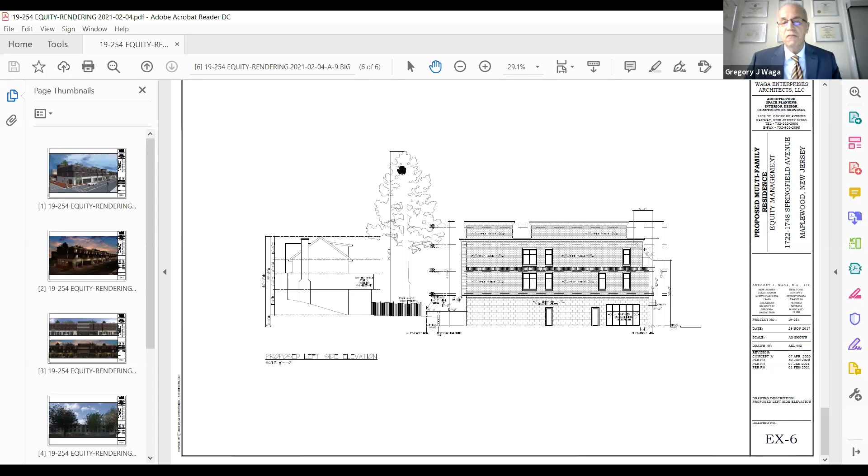I did visit the site and prepared this particular site analysis, the profile of the home that exists at 24 on the corner of Amherst and Wellesley. The only thing missing, which we didn't feel was important, was the front portico and stair. It had no effect, in my opinion, on this profile, as it faced Amherst. The deciduous trees vary in height from 35 feet up to about 85 feet, and you'll see that on my EX1 and EX3 exhibits.

They are deciduous species. I'm not aware of what they may be - maple, pin oaks, birch. I'm not sure, because they're in their dormant, hibernation stage. But the distances reflected on this elevation shot, which is a single dimension, is a direct proportion of our building here on Wellesley and Springfield, and a direct correlation to the tree located on the neighboring property at 24 Amherst.

I believe it was Miss Scott who testified earlier that she lives on this particular corner, and she is the only one with an attached garage that I'm aware of, because I did thorough research on the properties on Amherst from the street. She does have an attached garage.

Her garage door is located directly below what I think might be a kitchen or kitchen eating area. The majority of the home varies in height, as you can see. Our gradation also varies, sloping from Amherst, where my cursor is, in a southerly direction, then flattens out somewhat. There was snow cover when I prepared this, from our storm a couple weeks back. Her garage door is located where my cursor is, and they park two vehicles in this location. She has a 6-foot high wood fence that varies in height and follows grade.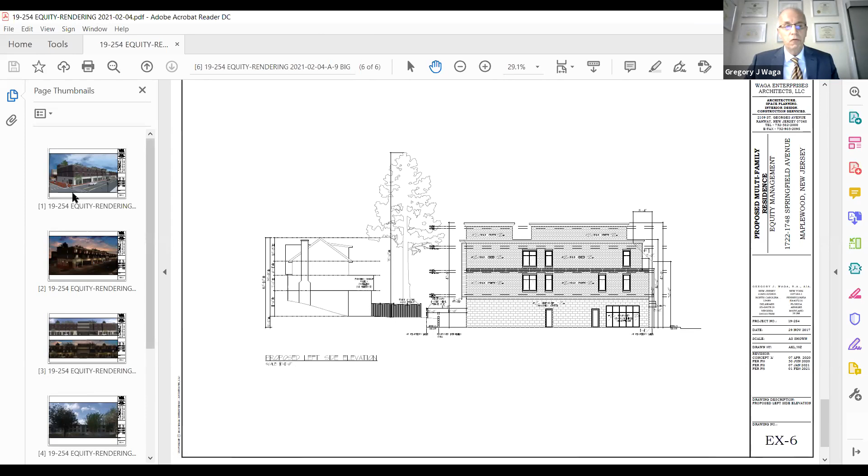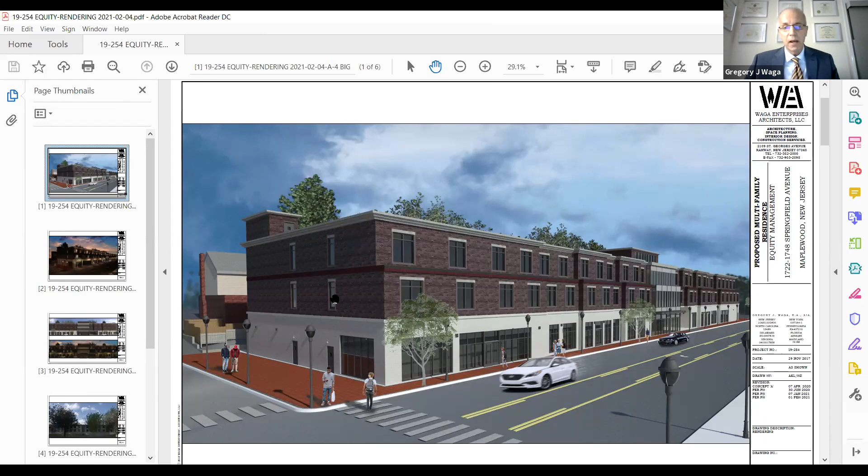So at this location it will be 13 feet or 18 feet, and then about 25 feet here. You can see the variation in the height of the adjacent dwelling at 24 Wellesley in relation to our structure. We feel the top of the roof at 24 Wellesley will exceed the height of our building by about a foot, based on grade. That's my estimation. I'll move on to EX2, an evening shot, and EX3 now shows greater clarity of what we feel exists.

Along the backyard, Ms. Scott did allude to the fact that not every homeowner had a detached garage. She is the one who doesn't. There are 7 out of the 9 or 10 properties along Amherst that do have detached garages.

Again, moving from left to right, this would be the tree located between 24 and 20 Amherst, which we feel is about 70 to 75 feet high. This has a wider spread, probably a maple from what I feel. I do dabble in landscape, though I'm not a qualified or certified landscape architect like my colleague, Mr. McDonough. I do enjoy landscaping, so I make a determination here that with this wide girth, it's a different species than what I presume is an oak tree in this location. This tree is slightly higher than the one to the left.

As you proceed across towards the center, you'll see this more efficiently in my next slide, exhibit EX4. Moving again left to right, we have the trees as we get down to Mr. Milan's property, which I believe is at number 6, on the far northeastern corner. The trees tend to decrease in height, getting to about a 45 to 55 foot height. This is what you'll actually see if standing back far enough, which you'll never really have this perspective of, because properties across from us are much closer than the perspective given here.

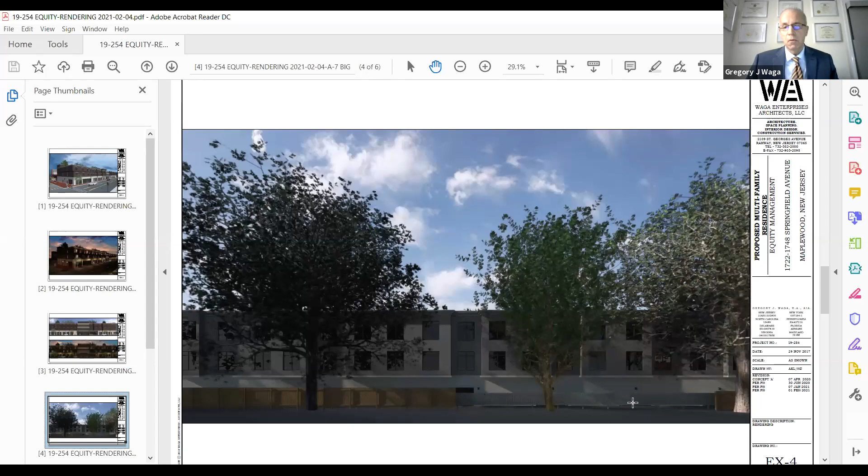We'll see in my next shot, which is an evening shot of this. We've diminished our lighting and basically placed it in an arbitrary fashion. A number of the bedrooms do not have lights now. We've shown them mainly in the living areas, but this is the exact same shot with the fencing in place.

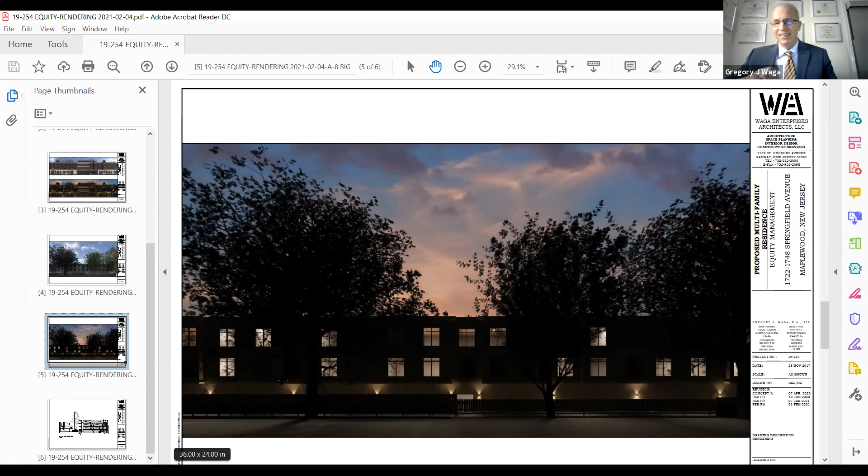Thank you, Mr. Waga, that was very helpful. I had specifically requested the profile view that shows the home on Wellesley at the corner. Yes, this one, and I find this very helpful. I trust other members of the board do as well.

So to members of the planning board, do any of you have any questions for Mr. Waga regarding his current testimony, his additional new testimony?

Just one, maybe I missed it, but when you were showing the trees in the back, those are all trees that are on the single family resident properties, right? Yes, Ms. Ward. Okay, yes. All right, just, okay, thanks. Yes, yes.

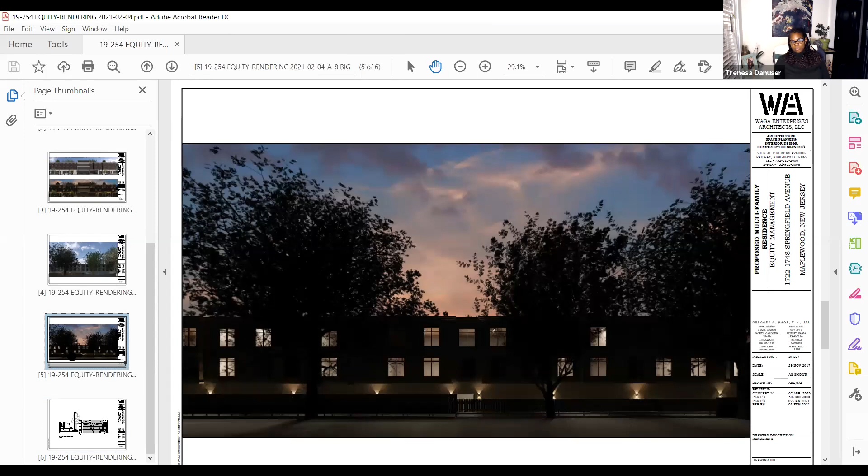I'll just say to Mr. Waga that the profile image is very helpful to give us a clearer understanding of the correlation between the new building and the single family property. So thank you for providing that. That rendering in particular answered a lot of questions we've been asking for. The side profile you just showed is very helpful for us to sort of stand on the street and understand the size, the grade, and how that would affect the neighboring single family homes behind the property. Thank you. You're very welcome.

I completely concur with Ms. Danuser, this really answered a lot of the spatial questions I was wrestling with. Yes, indeed. Do any other members of the planning board have any questions for Mr. Waga?

All right then, I want to be mindful of the time, it is 10 of 11. So do any members of the public have any questions for Mr. Waga? Mr. Helmkamp.

Nope, you're on mute, Mr. Helmkamp. Actually, my fingers were just a little bit slow that time. Oh okay, I thought you were already talking. Go ahead, so this is more a point of procedure, perhaps.

I'm wondering if the applicant will be back to the planning board when these design decisions are finalized. Mr. Waga mentioned a number of points that were a work in progress.

Well, the work in progress matters, Mr. Helmkamp, we're primarily working with the Springfield Avenue Partnership, and there were design elements per our numerous meetings with that board regarding aesthetic materials. A number of materials have already been decided upon. We're now fine tuning various relief elements on the facade, projections, but a number of the materials have already been selected and agreed upon between the SAP as well as our team.

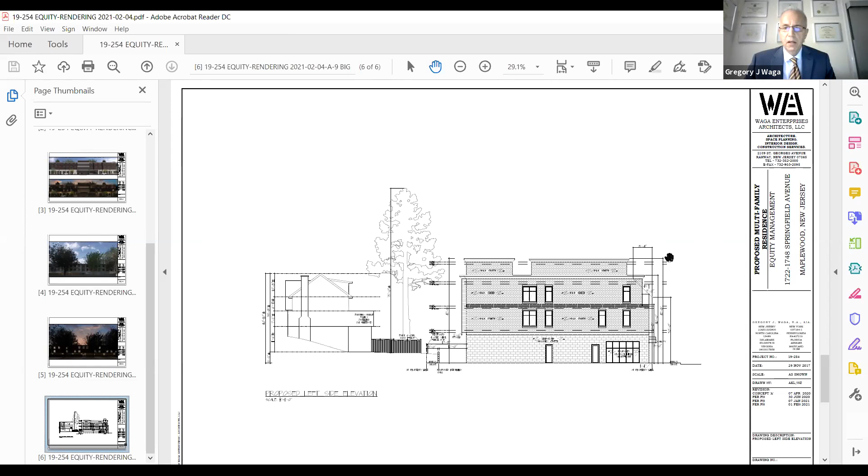Okay, so we satisfy... I'm going to zoom in on this profile. We satisfy our step back on our access area here at the front elevation. This actually occurs... let me zoom out here.

This actually occurs quite a distance off of Wellesley. It's more or less in the center of the site, but when you're looking at it in single dimension profile, it seems as though it's right on top of you. So this is actually quite a distance away.

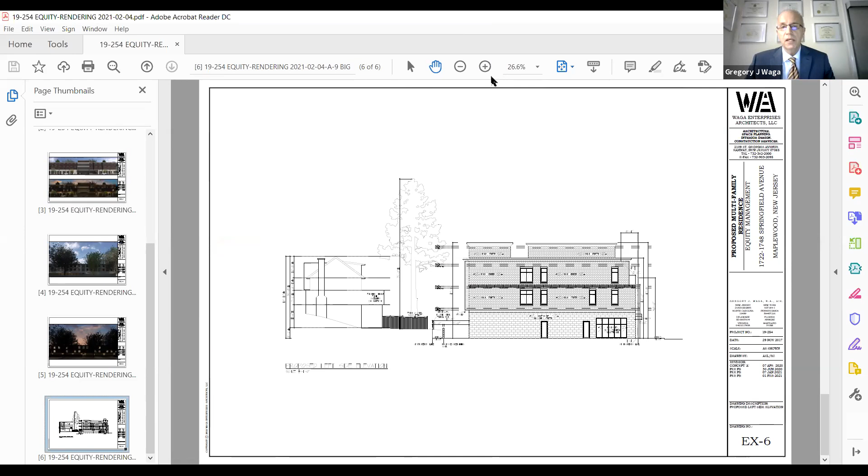This is our stair tower, so that has nothing to do with any type of setback. But with the 20 feet off the property, or off the face of curb in this particular case, which we are.

Unfortunately, I don't have that red line document, but if you recall, there were 3 items that were redlined on Mr. McDonough's presentation or exhibit. One was the 13-foot here for the walkway, which is the majority of the walkway. The other was the sight line here of between 10 and 16 degrees. And then this was highlighted at 20 feet from face of curb.

We satisfy that anything above 50 feet is 20 feet off of the face of curb. I thought the requirement was from the facade.

No, not along this. This decision has been taken into consideration, and I think Ms. Moore can assist with that, or Mr. Intandola can interject as well. But the determination was not from the property line; it was from face of curb on Springfield Avenue.

I see. Well, the drawing is misleading, or at least confusing to me, because the diagonal line shown is from the property line. It's from the property line, but that's at 30 feet. That's right, not 50. If we went up to 50, this building... we decreased the height to below 50, so as not to create any type of further confusion and/or variance.

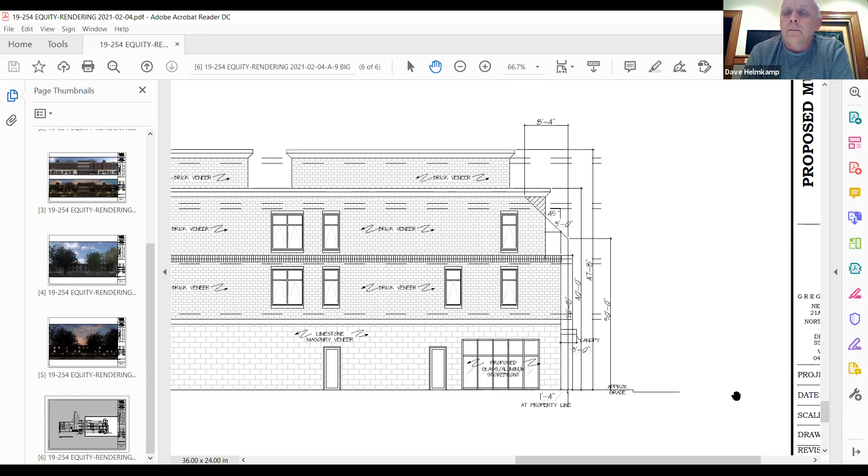Thank you for clarifying. I guess this is a point of education for me. That bulkhead also contains storage for tenants. I didn't realize that would be considered a bulkhead. It actually has conditioned space. Is that still considered a bulkhead? Yes, it would still be considered a bulkhead in this case because of the access with the elevators.

Okay, thank you. Yeah, that's a good point though. I mean, that is occupied floor area, and they're permitted to have that floor. So I would think it would be floor area, not a bulkhead. Right, sounds correct. Right, it's another story. Oh, yeah.

So the review of the project used it as a bulkhead because there was nothing else to be used on the access to the roof area. Well, and the decision to use it as storage space came later, didn't it? That was my recollection, that there would be storage space in this top area, which is identified as...

Can we take a look at the roof plan again? I'm not in a position to share that at this moment. I'd have to dig that up somehow. Okay, well why don't we do this. Given that this is an outstanding question, and it is 11 o'clock, I propose that, with Ms. Moore's agreement, we conclude for this evening and take this up at our next meeting.

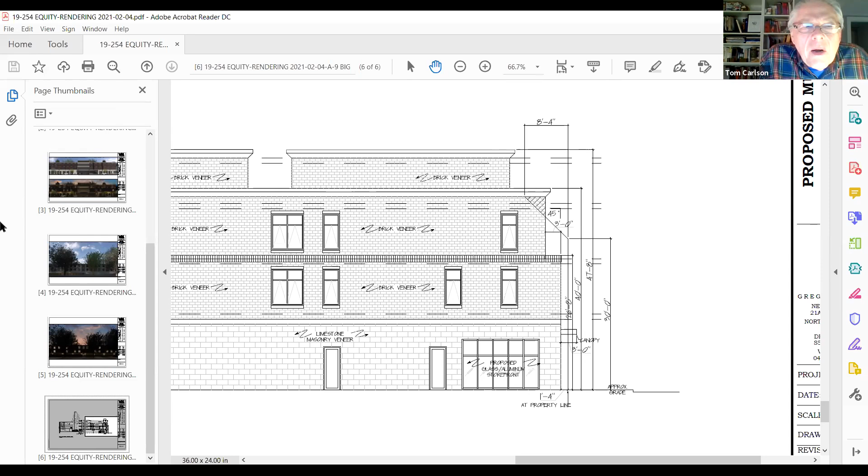I can talk with the architect directly, so there would be no need for him to be at the meeting itself. Karen, is there a member of the public that wants to question Mr. Waga? That's a good question.

Right now I have Mr. Helmkamp. Have you asked all your questions of Mr. Waga that you wanted to? Yes, I have, thank you. Mr. Moulin, do you have questions specifically for Mr. Waga? I do - I promise it's one question, so I'll keep it quick. Okay, I'm willing to go with that.

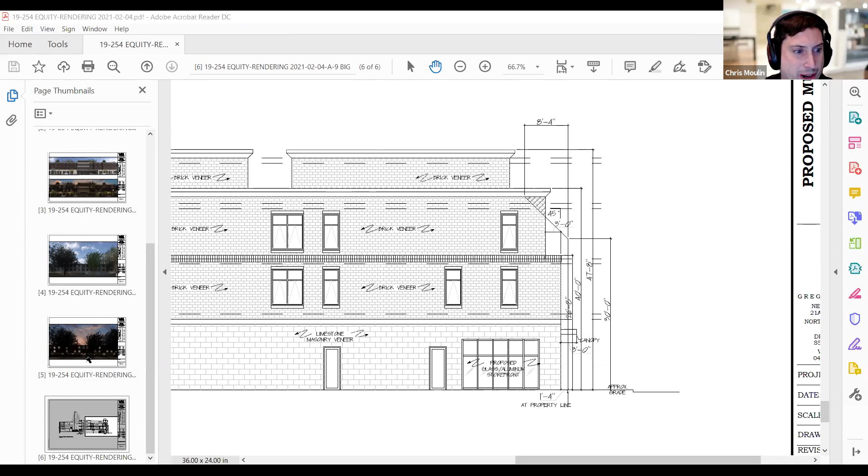Go ahead. Mr. Waga, if you could hop to page 4 or 5 of this - I just wanted to point out, I really appreciate you doing these drawings again. Is it this one? I actually have 6. So you said 4 or 5 - I actually have 6. Yes, is it this drawing? Yes, it is this and the nighttime drawing as well.

I wanted to point out how much the mature trees on the Amherst property line really take the project impact from a privacy standpoint. It significantly improves the privacy of both the building and the residents, as well as the impact the building has on the general character of the overall neighborhood. My question is whether you know how many of these trees exist, or what general percent coverage of the building exists with trees on Amherst properties.

I believe, regarding the overall width, I did take a count, but to the best of my ability from the Springfield Avenue side - I didn't want to burden any of the property owners on Amherst by accessing, as I alluded to during our last meeting. I believe there are between 9 and 11 trees that exist on Amherst property. I don't know - again, I didn't have the site plan. I'm not a surveyor. I understand grade, I understand the process of engineering, but where the property line fell, Mr. Moulin, in direct correlation to where the vegetation exists, I couldn't tell.

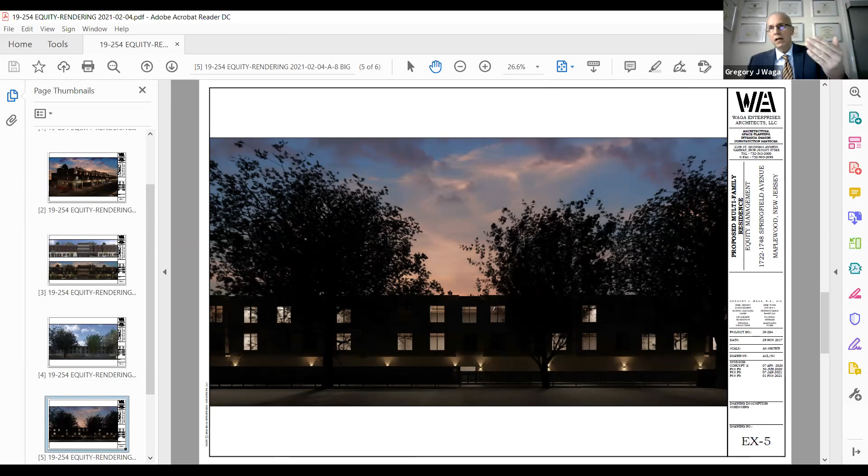Yep, that makes a lot of sense to me. Even in their non-dormant state, I would not be able to tell you what kind of tree they were. But thank you for the explanation, it provides context around why understanding exactly what that landscaping plan looks like means so much. Okay.

Thank you, and thank you Mr. Moulin for keeping that brief. So Madam Chair, if I may, excuse me. I know it's very late in the hour and I appreciate the time, but we just wanted to bring back Mr. Badana to answer one question that Mr. Fry had raised regarding the setbacks. We think it will take about a minute, but wanted to get that on the record before concluding tonight. Yes, that's fine. Thank you. Thanks, Madam Chair. It'll actually take 30 seconds.

I can't remember which board member asked me about another building that had a non-conforming step back, I think it was the 4th story. But the answer is catty corner across the way. I had worked on the Elite project, and that's actually flush 4 stories up, within the 200-foot ring. It's flush from top to bottom. Okay, thank you. You're welcome.

That was not my question. My question is, where is there a 3-foot setback that exists? In your previous testimony, I thought you had suggested that was a condition that existed on the avenue. No, that's not correct. That answers my question. Thank you.

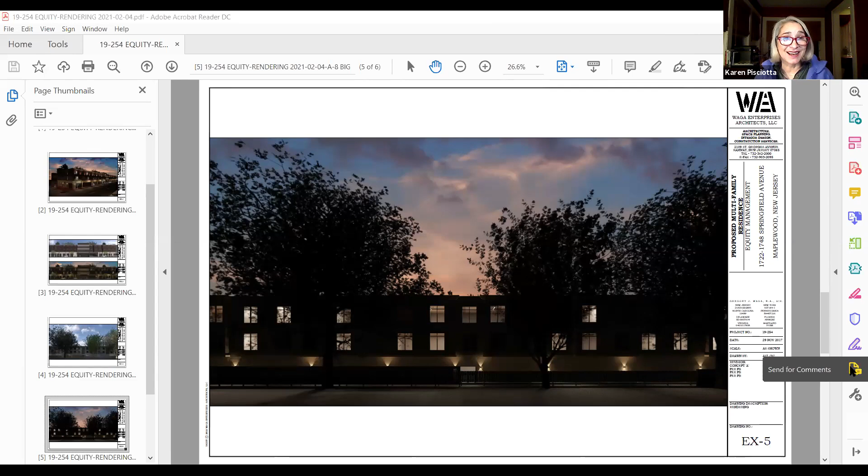You're very welcome. So are there any members of the public who wish to address the planning board regarding anything other than the application? All right, seeing none, I'd like to entertain a motion to adjourn for this evening.